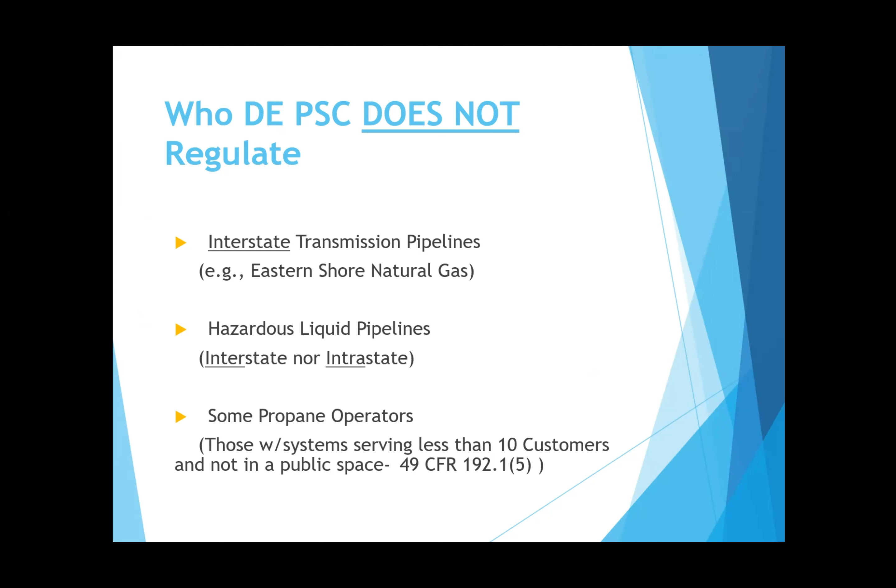Okay, we don't - the Delaware PSC does not regulate interstate transmission lines like Eastern Shore Natural Gas, which is a big transmission line that runs down the center of the state. That's interstate, meaning it goes between states, and we don't have jurisdiction on that. We only have jurisdiction of gas that does not travel outside the state boundaries. We don't have any liquid pipelines in-state or interstate, and we only have jurisdiction on propane operators that have more than 10 customers hooked up, like a community system or tank system. So a lot of the propane stuff we don't regulate.

Okay, so there's me, I'm the program manager. Then we have Chavis Bianco, some of you are familiar with, and then we have a vacancy now because Bob Shafkin retired August 30th. So we're still actively trying to hire a replacement, and it's not happening very easily. We'll keep trying - it's going to affect us because we lost 50% of our inspection capability.

And then we have the underground damage prevention program. That's been in effect since really enforcement started in May of '21. So we haven't been doing it that long, about 3 years.

It started off very lightly, and then we've been ramping up enforcement as time goes. We'll get into that later.

We also have Lorraine Paget here. She's a new admin, started in March, and we sorely needed her because she keeps up on all the record keeping and tracking of all the underground damage records, the NOPVs for underground damage, the consent agreements, and typing up the drafts and stuff. She's very, very good, and also very good at Excel.

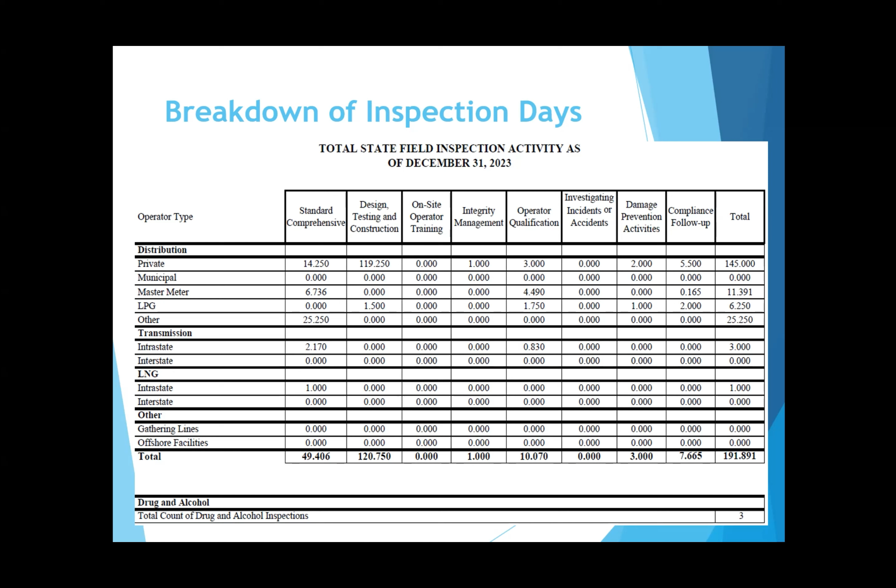We have to make sure that they are continuously requalifying their installers, and we have follow-up time also. So you can see how it all adds up across the different types of operators that we have. It's kind of boring, so let's go on. I know people are going to glaze over looking at this slide.

Now we're going to talk about some of the enforcement actions we've taken between '22 and '24. In '22 and '23, we issued 7 compliance actions containing 19 violations and civil penalties of $14,000. Not a lot, compared to some states, but it still has an effect.

So far in '24, we've issued 3 compliance actions, 11 violations, and penalties of $67,012, which is still on the lower end compared to some states.

But most of the violations our inspectors are finding are not following their own written procedures, and that's bad. Also, sometimes we run across operator staff whose qualifications have expired and they didn't renew them. So that's not good either.

And then sometimes equipment certifications are out of date and not maintained. We also look at the regulators, critical valves, leak surveys, and those things aren't always completed annually. So that's just some of the major ones that we see.

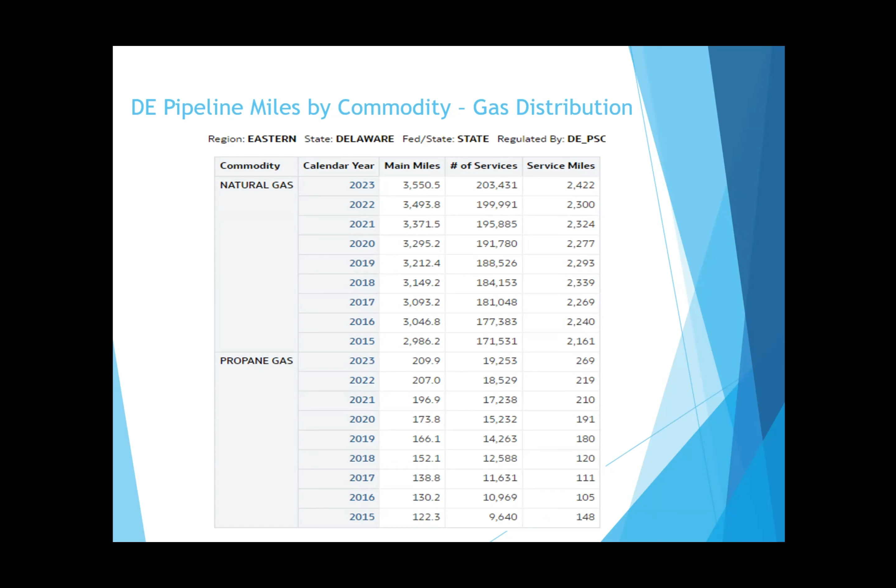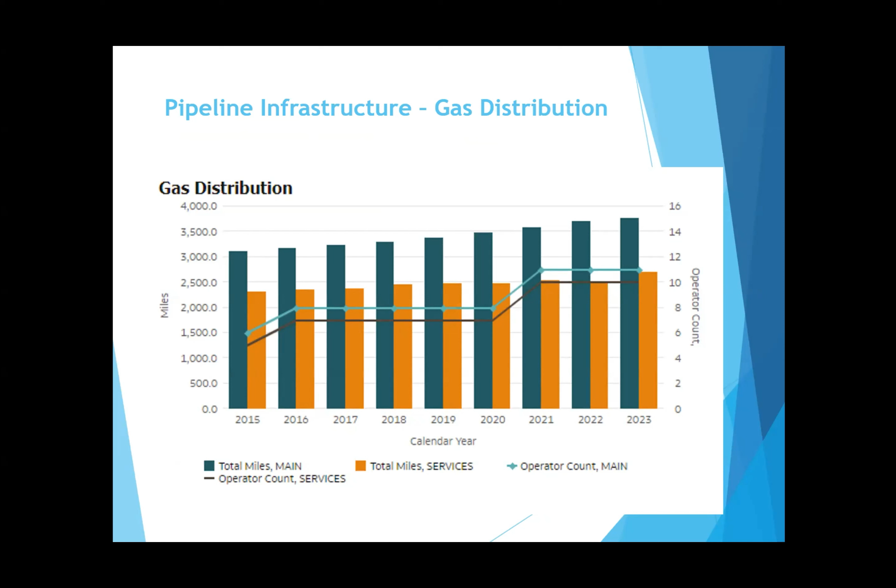Now this is a chart of another way of looking at the data in graphical form, the gas distribution in Delaware. You can see the orange is the total miles of the service lines, and the dark is the main. So it's going up, not tremendously steeply, but it's going up. Let you look at that a little bit.

This is a little more data on distribution here in Delaware. We have 3,760 miles of mains, 24 miles unprotected steel coated, 616 miles cathodically protected steel that are coated, 41 miles of cast iron, which should be completely replaced by 2027 because cast iron leaks a lot, and most states have a cast iron replacement program. We're very lucky we just have that small amount.

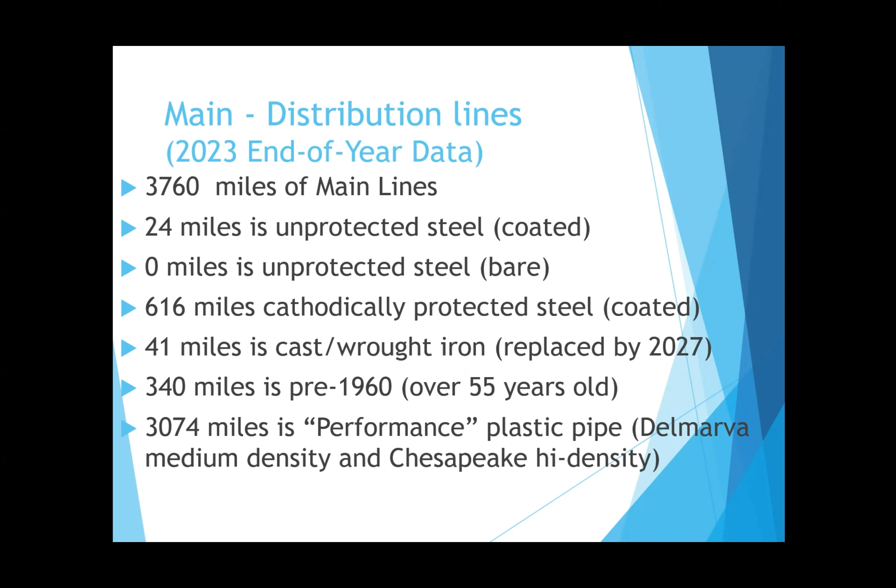Then we have the service lines. We have 2,691 miles of service lines, 81 miles unprotected steel, 190 miles cathodically protected steel coated. Of that, 2,370 is the performance plastic pipe.

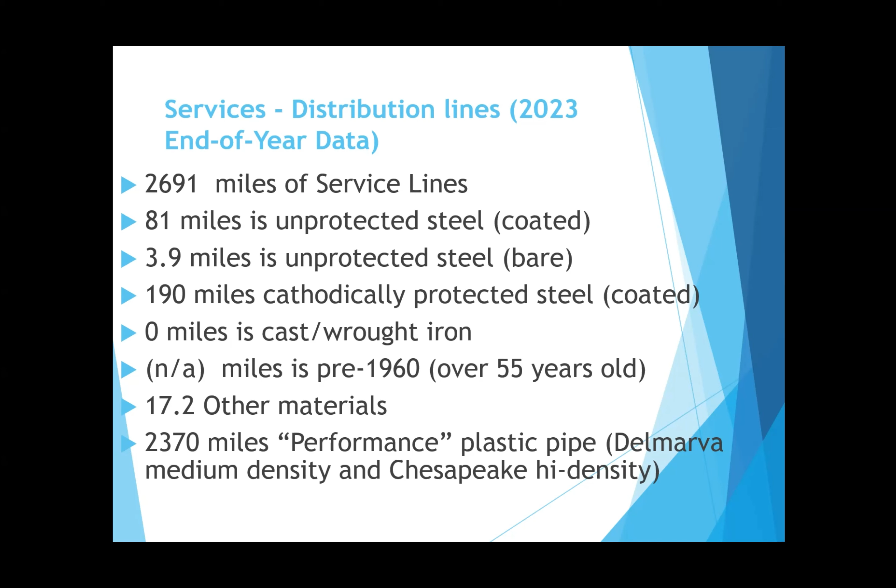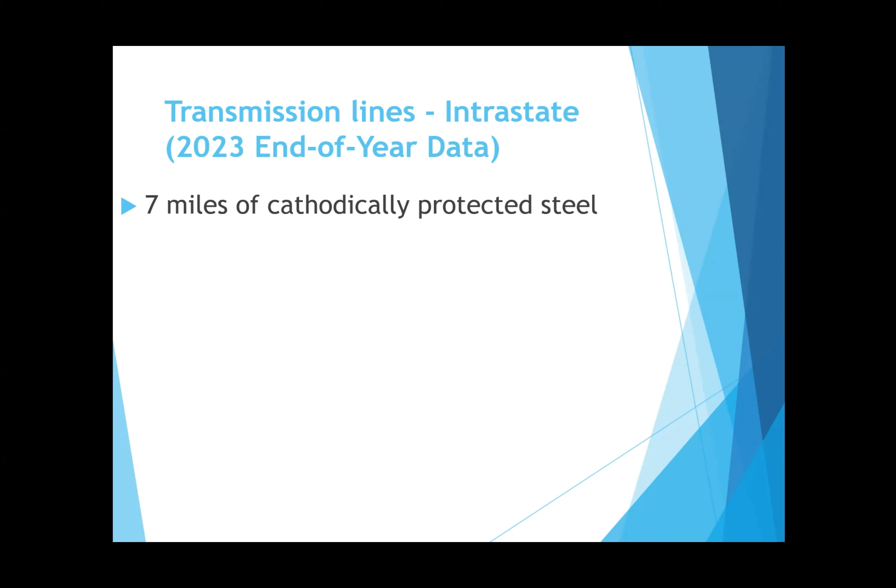And we have transmission lines. We have about 7 miles of cathodically protected steel. That's jurisdictional - that's not counting the Eastern Shore that goes down the middle of the state. That's jurisdictional to PHMSA, so we don't have anything to do with that. PHMSA is the Pipeline and Hazardous Materials Safety Administration.

Now I'm going to talk about the Delaware Underground Damage Prevention Program. We were one of 4 states deemed unacceptable - we weren't doing any enforcement, and PHMSA said we had to pass a law, and then once we passed the law, we had three years to get it into effect. So we passed the law in 2018, and it became effective in December 2020. That was right about the time COVID hit, so that kind of kiboshed it for a lot of people because of the COVID requirements. So we didn't really start enforcement until 2021.

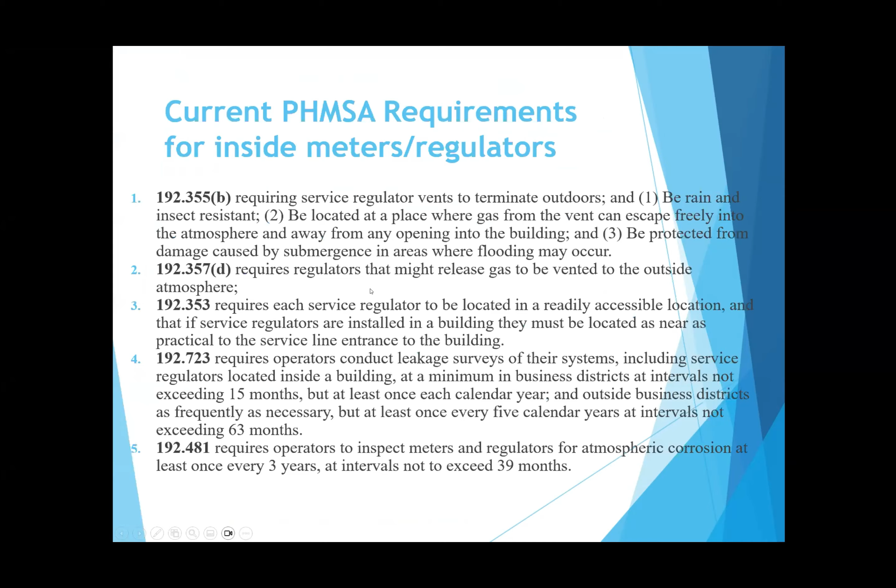Now let's go to the next one here. How do we do that? Just scroll down, or just click on it.

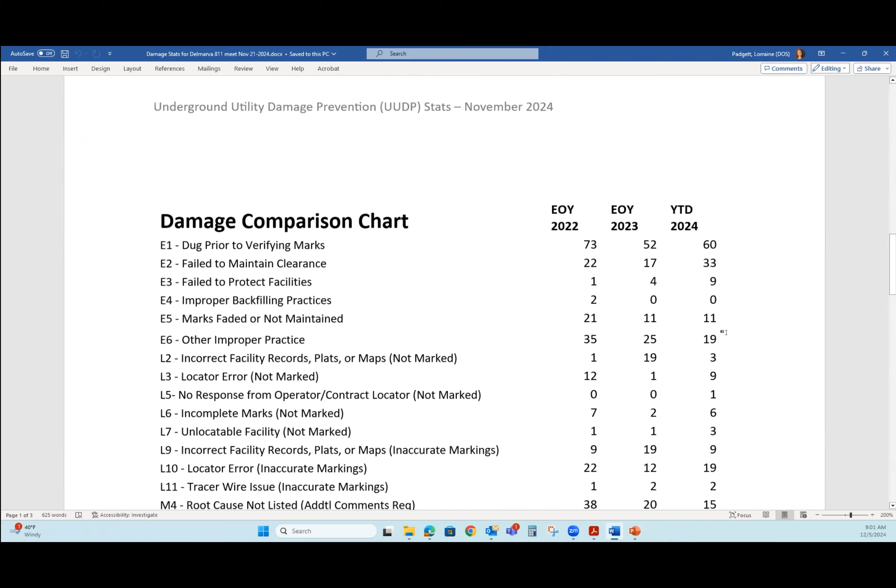This is our damage comparison chart, and then we have the damage repair cost estimates. This is basically all the information that's in that bar graph that we had up there.

We stay pretty steady, but then when you look at the damage repair cost estimates, what they're hitting is different, because it goes from $500,000 for two years in a row up to $833,000, so over $750,000.

We suspect the reason for the surge is the huge amount of infrastructure being put in place this year. You have a tremendous amount of buildings as a county, probably up north too, and then you have the fiber infrastructure going in everywhere that the federal government is paying for, and that's causing damage.

Luckily, we haven't had any PHMSA events, but that's not to say that the damage is not leaking. It's just not at that level yet.

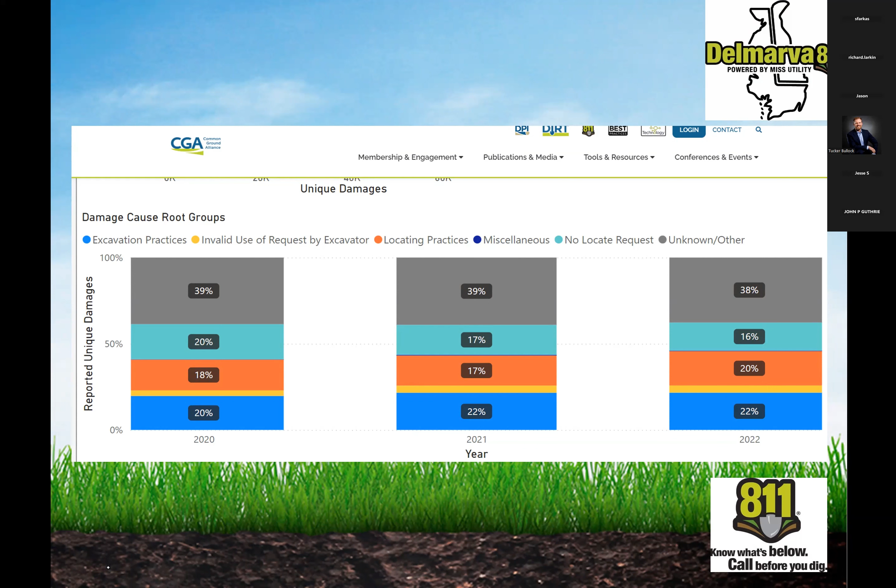It's important to understand that any sort of disturbance of the ground is considered excavation. Now, there are exemptions in our law for certain activities, i.e. agricultural work or patch type paving. But for the most part, if you're putting anything in the ground, that's considered excavation by law. So if you're putting up a fence or if you're putting in a tent that needs to be staked -

I can give an example. There was a very large tent that was put up on the green in front of Leg Hall here in Dover. There was a big political event going on, and they didn't call in a ticket, and they drove these massive tent stakes down into the ground, and it hit a water line, and it turned out to be a very big, messy issue. Maybe people don't think driving a stake into the ground deserves a call in to get the utilities marked, but it is very consequential if they don't.

So again, anytime you're digging into the ground, it's important to understand that you need to call in a ticket. It's a free service. We have multiple ways for you to get that information in, either via the internet, there's a mobile app that we have, or the old-fashioned way of calling either 811 or the 800 number on the screen. I should mention that our website has changed to delmarva811.com. However, if you still type in Miss Utility Delmarva, it'll redirect you to our website, so that should be good continuity in there.

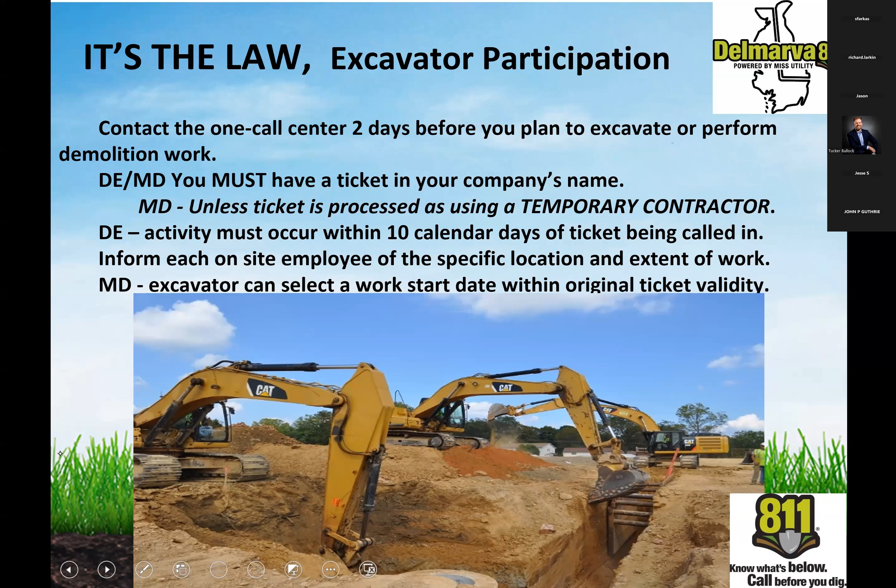With regards to excavators, there's a lot of information necessary to be submitted to do the work in Delaware. A lot of times we see the major issue in our industry is communication, and getting the right people to talk to the right people when there is active construction is important. So a lot of the stuff that needs to be submitted by the excavator as well as the facility owner are in front of you. We need good phone numbers, good emails so that we can get in touch with people. There's nothing worse than getting a phone number to a clearinghouse and you've got to talk to a robot, so having good numbers is very important.

So what we do in conjunction with our contractor, One Call Concepts, is we send out a yearly update to get this information from everybody, both the excavators and the facility owners, so that we have the most up-to-date information possible to make sure the communication can be as beneficial as possible.

So again, I'm not going to read every one of these things. One thing I would mention is that a ticket length is a quarter mile, so if you have anything longer than that, that would require two different tickets, and we'll get into that later in this presentation.

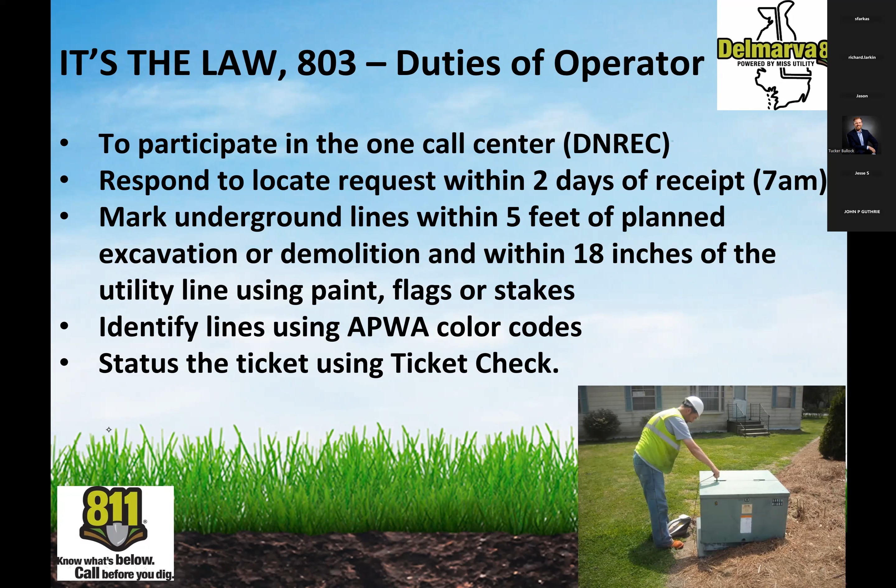And of course, the color codes are very important, which we'll get to in a little bit. And then the facility owner then has to utilize, they have to status the ticket through the ticket check system to make sure the excavator knows that they have marked the infrastructure.

I will say that purple, which is reclaimed water, irrigation, slurry lines, are becoming more popular. They're very, very popular in the southern states, but they are moving their way up the coast. So in this region, we're starting to see more and more of that being marked out.

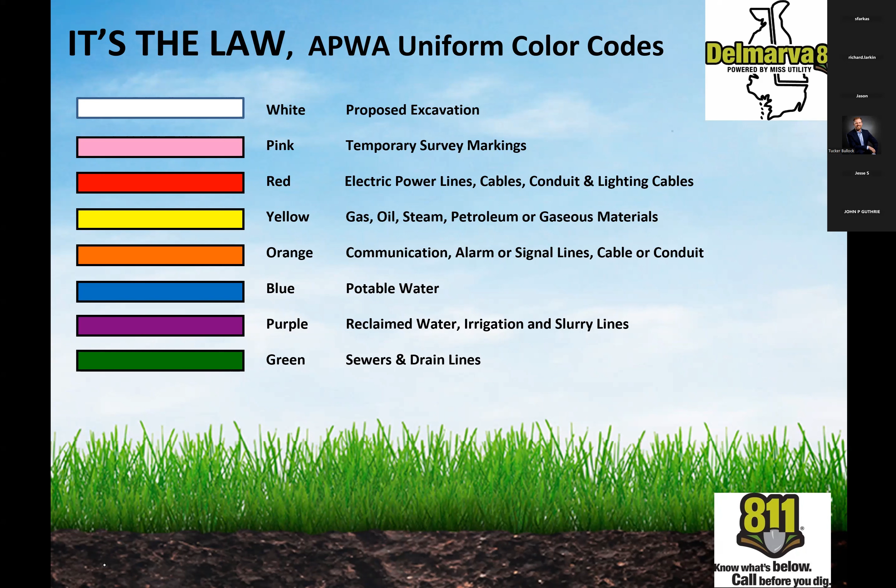Generally speaking, there are rules for each utility type with where their ownership stops. For example, with gas, generally it's at the meter, which is on the side of the building. With water, it's at either the meter or the curb stop, which is at the property line.

So it's very important for everyone to understand that some utility companies don't mark onto private property, and that is a business rule that they would have provided.

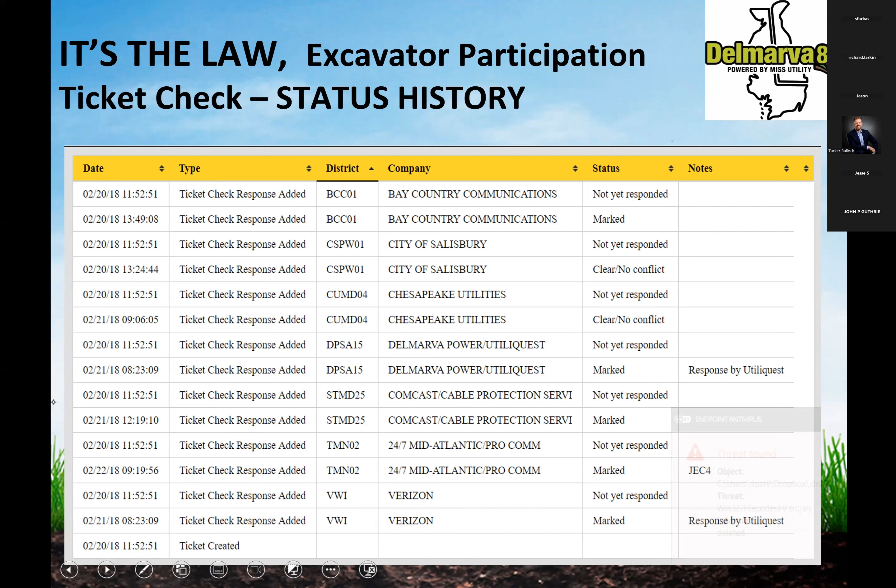Because ultimately we're trying to protect infrastructure and people, and we don't want any sort of accident to happen if it doesn't need to. I realize this would cause delays in construction, and time is money, but we're really trying to be safe here.

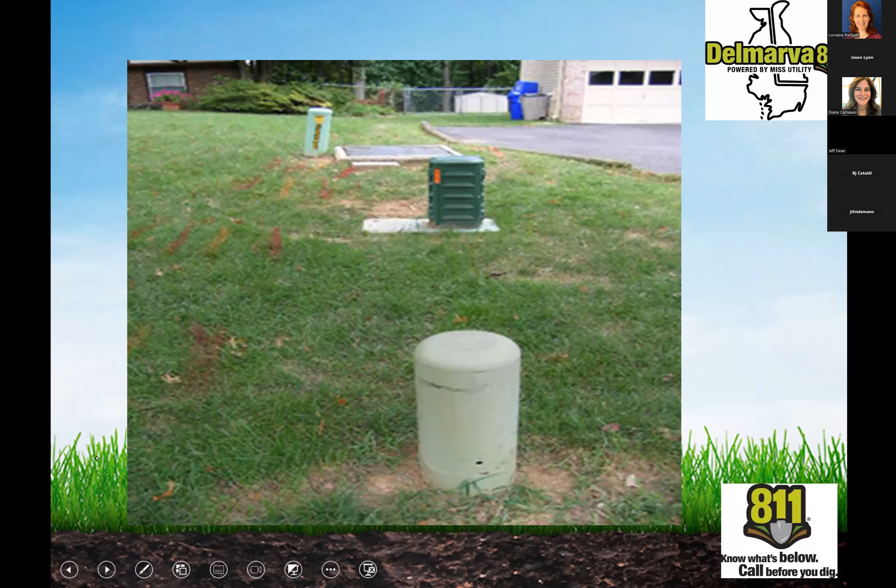Again, more examples of unmarked facilities. If you see something like a gas meter and there's no yellow lines coming out of it, that's probably a problem that didn't get marked, and we should be prudent and try to find that information. A fire hydrant with no blue lines coming out of it means it's a mismark, or a light pole with nothing on it most likely means you're missing some electric lines that were not marked.

When you are an excavator, we talked about the tolerance zone earlier. Currently in Delaware law, you are to hand dig within 24 inches of the mark. This means you have to be careful when you're within 24 inches of a mark to locate the utility before you can use excavators or mechanical equipment. We always urge folks to start from the outside and work in, carefully digging to find that utility to make sure they don't damage it with an excavator, backhoe, etc.

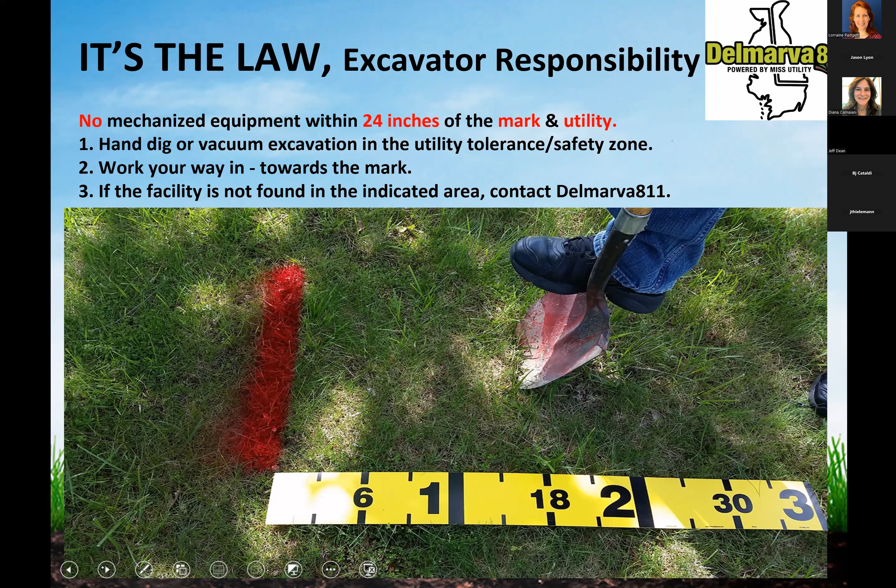This happened when they did their 2 foot safe dig. The good news is no one got hurt, and the actual active line was the one on the right, not the left. So this is an example of doing prudent excavation to the letter of the law, resulting in a safe outcome. We urge folks to always dig 24 inches on both sides to make sure everything is clear.

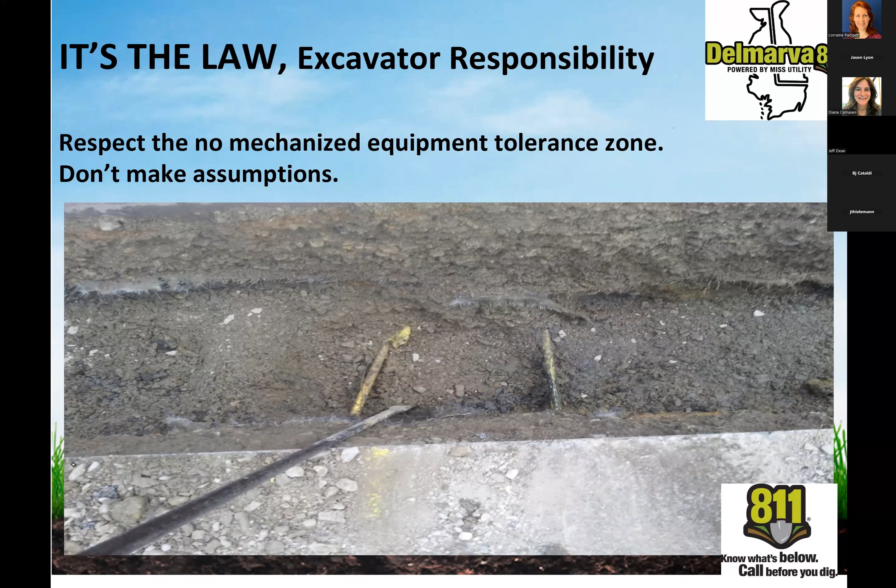Okay, so this is essentially, again, back to the excavators. If the marks are damaged, which often happens on a large site where there's a lot of grading, you must call in a remark ticket. That is on the onus of the excavator to make sure the marks are still active and can be seen.

Also make sure that you have a valid ticket. So if for some reason the scope of work changes, or if there's a long delay on the project, just make sure you update the ticket, so that all the utility companies are aware that the project is still going on.

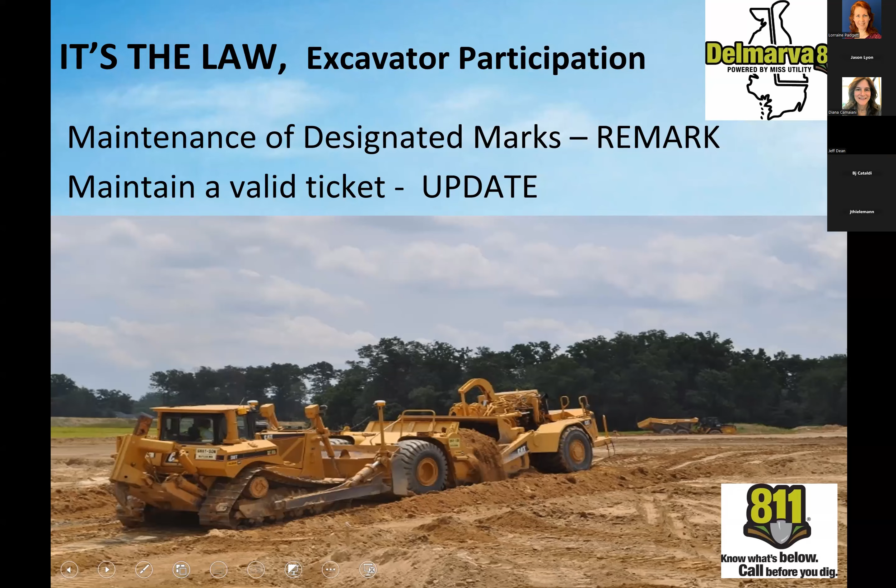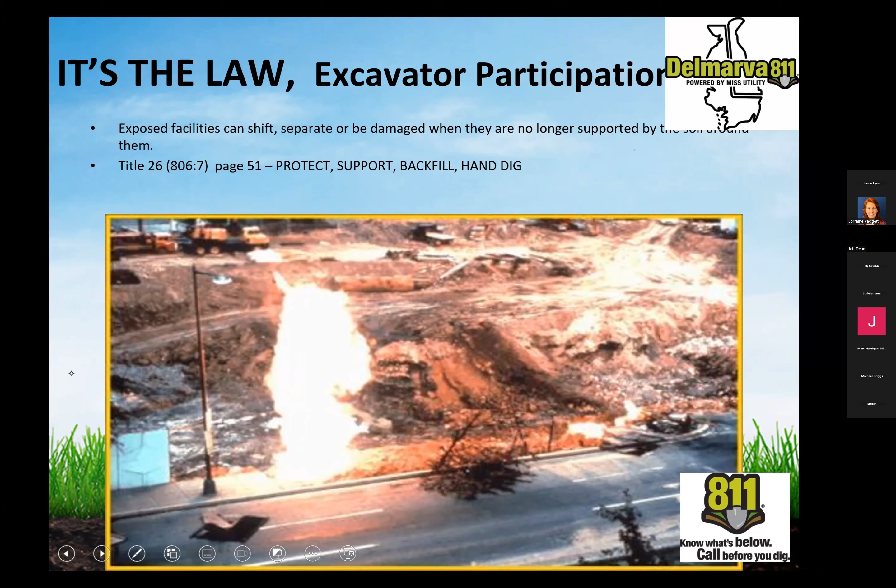This is another example of when you're installing infrastructure, you're going to come across different lines. Make sure you support them and dig around them safely and be careful when you do that. We have a note here about damage reporting, which we'll get to in a little bit.

That's Maryland law, we're going to skip that for the basis. This safety presentation we provide to contractors and utility companies is kind of an all-in-one presentation. We try to show folks that there are consequences for not doing this.

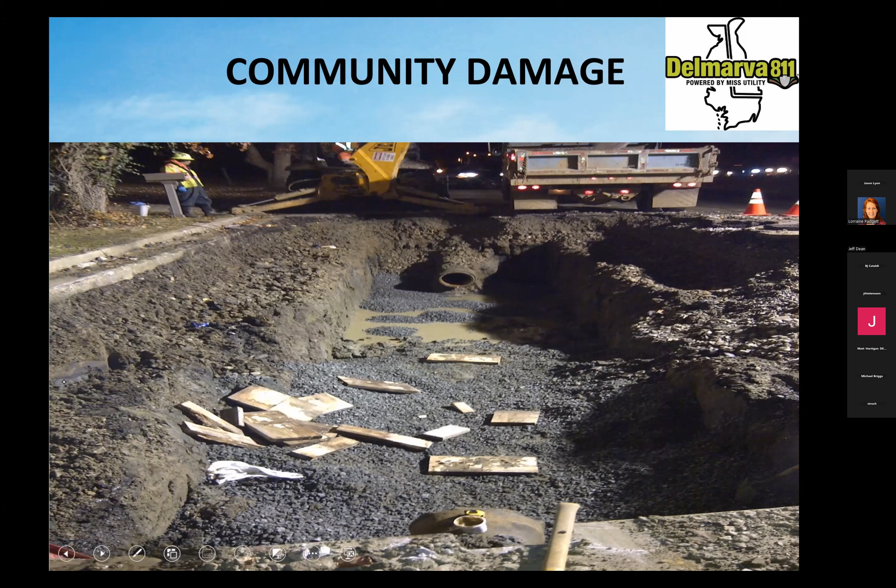This picture shows how much stuff can be put in the ground. This was a boring job that ripped up a whole bunch of underground infrastructure. What we're trying to show folks here is, on the picture in front of you, there are two saw cut lines through the asphalt. You'll notice that there is no paint on the ground.

This is another example of, as an excavator, looking around your surroundings and seeing that if there's a trench, a saw cut trench, there's probably utilities in there. And if there were no marks on the ground, then maybe you should have called in. Well, you certainly should have called in the first time, but you would have to call in again if you didn't see any marks.

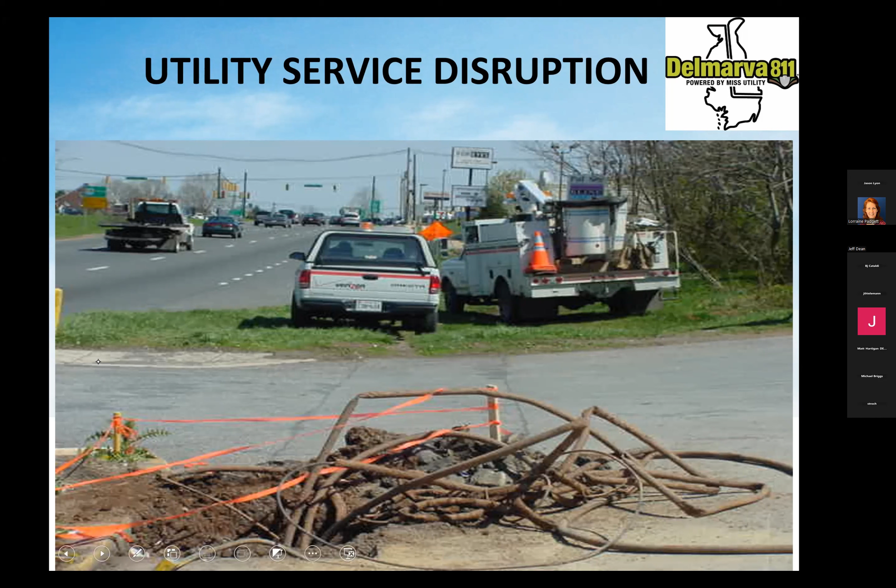But I think everyone should understand that it's not just you. If you were to get into an accident, obviously you have to deal with it, but your family members are now going to have to suffer for that. So as an owner of a utility company or an excavation company, please take this to heart and follow the rules in place to protect this from happening. I've heard too many stories in my 15 years on this board of this sort of thing happening, what it tears families apart, and not to mention what happens to the person physically and mentally going through this.

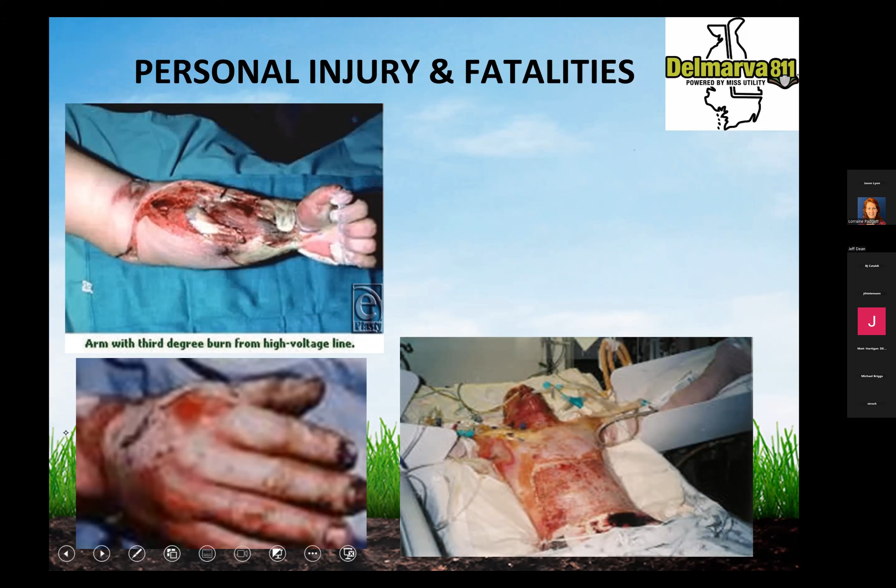Shifting gears a little bit. Wayne mentioned the requirements from PHMSA to report damages. The Public Service Commission is the entity that would receive the notification. As Wayne mentioned, if you're a gas company, you have to report every damage. If you are non-gas, anything over $3,000 must be reported within 15 days of the issue.

Again, I want to emphasize this discussion is really about safety. Boiling it down, obviously there's laws and best management practices, and there's always the give and take of getting the project done on time and getting stuff located. But ultimately, we want to keep humans safe, the environment safe, the utility and property safe. So that's our big message here.

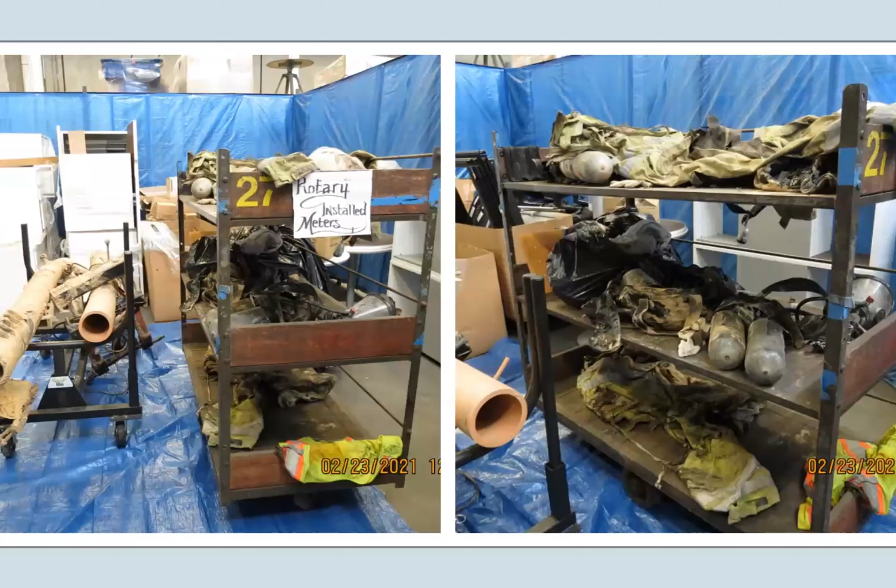This operator has an incident investigation procedure as required. They have a process to store and handle and collect a lot of evidence, and it doesn't have to be anything fancy.

It can be something as simple as this - just a warehouse that's secured with some chain link fencing. It has some tarping, and you can see it doesn't have to be CSI Miami. This is a warehouse that does have extra items in it that are not evidence, but it's secured and there's a log and only one person has a key. He doesn't let anyone in or out without that key. And so you can start seeing we have pipe fixtures, the things that you can see were collected during the actual incident are now here.

And now, after having more of the information come into focus, we have the opportunity to review that and any types of records of the chain of custody.

I want to just let this sit here again. Someone was wearing this uniform, this fire retardant clothing, this breathing apparatus, and this hard hat - all speaking that this person was well aware of the hazards of the product they worked with, and they were prepared to follow procedures because otherwise they wouldn't have been wearing this. And you can also see the significance of the injuries that fire retardant clothing still failed to protect this person.

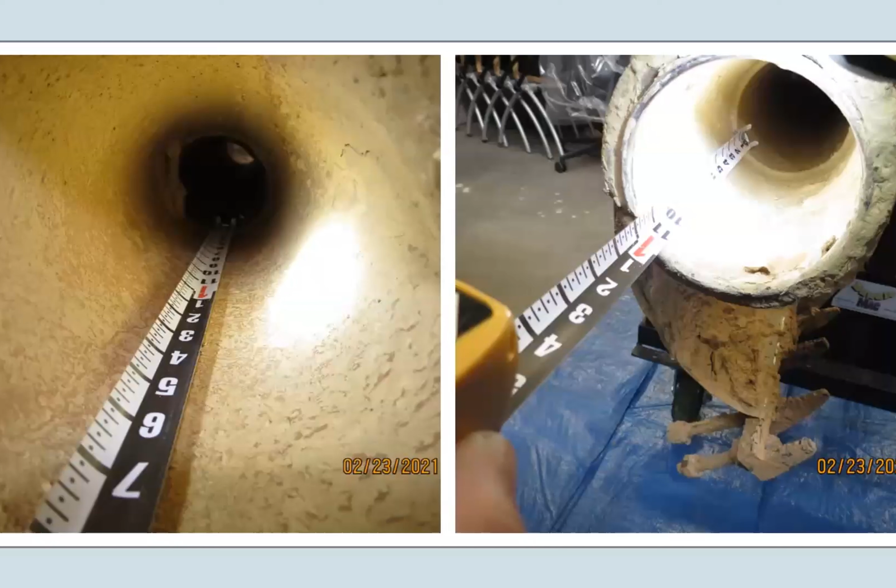So we're looking at some of that pipe. Again, I drew attention to a piece of pipe that looked like it was cut, and now we're seeing this is certainly a fusion, using tools to document the depth, length, and diameter of pipe. We can see this is stick-built pipe, a typical length.

It's unusual to have a fusion about 11 inches from the end of the pipe. And then after that fusion, there's another fusion. So I have some investigative inquiry and questions for our operator.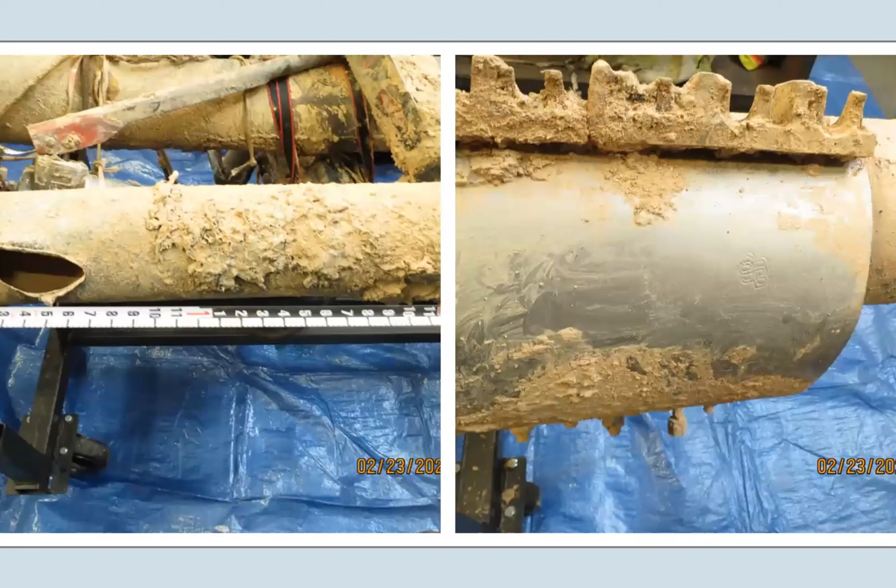Here's an example of documenting the actual defect that I showed you in that mud slurry. A lot of speculation - we can start creating hypotheses about what could have occurred to the pipe, but I'm not a material scientist. I need someone qualified to look at this piece of pipe and tell me, was that thinning of the pipe wall due to heat impingement? Or is that some type of material failure?

I can say that this appears to be some sort of metal deposit on the pipe, but I can't tell you what type of metal. I suspect it may be sloughed off aluminum from the shoring box.

Here we see another Smith-Blair clamp, and these are the two pipe segments side by side. There is value in also using analogs - ask the operator, we inventoried your truck, and these are what we're seeing in the evidence locker. What type of clamps are approved or in use on your pipeline system for the work this crew was doing? This picture documents that Smith-Blair type clamp and another type of clamp the operator was using at that point in time.

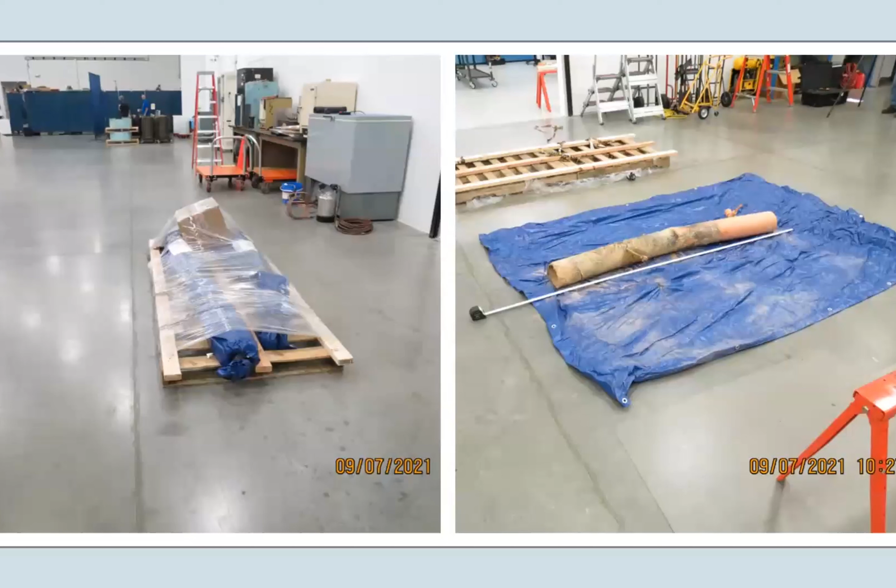All that being said, we, the regulator and the operator, need to know more about exactly what caused the incident. We need to evaluate the material and the fusions. So the operator selected a laboratory. The evidence is thoroughly packaged, methodically transported and cataloged. These are pictures from that laboratory examination where the material is carefully unpackaged, examined, and documented yet again.

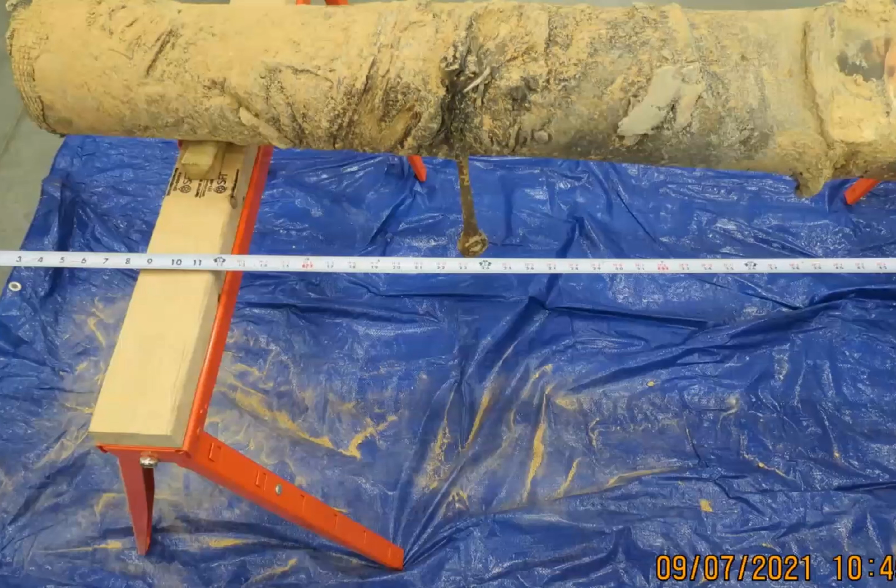We can see the segment of pipe - an Aldyl-A historical legacy pipe - and we also see some defects in it. This is a half inch ratchet that's fused and melted into the pipe. We see a lot of heat impingement and damage to the pipe. We can see some markings consistent with the analog we saw with the sleeving material and gasketing material inside that Smith-Blair clamp.

Prior to any examination, whether plastic, forensic, metallurgical, in-house or outside, there really should be a dialogue between operator, regulator, and interested parties to establish some sort of examination protocol. How will you receive the pipeline segments or evidence? From that, what will be the various cataloging and examination steps - NDT testing, and then destructive testing. Because after all, you want to make sure you do all your non-destructive testing.

And then you want to do your destructive testing. What are the objectives? Make sure each party is informed - this is what the plans are and how we're going to examine this. We're going to do all this NDT testing, and then we're going to destructively test this portion.

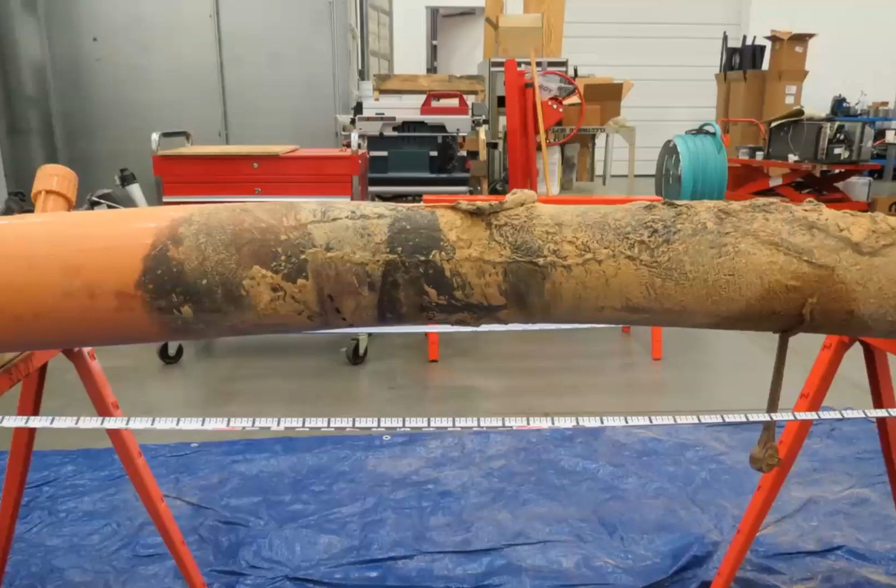Here's an example of packaging and documentation, again focusing on that half inch ratchet. Cleaning is part of that - this is after the pipe is gently cleaned to show more of the defects. These sawhorses are leveled and shot with a laser level, and you can see there's a defect or a hump in this pipe.

Again, I'm not a material scientist, but as an investigator, my question is whether this defect is part of the heat impingement and plastic softening. I would say more than likely, but that's a question for the material scientists and engineers conducting the forensic examination, which in fact it was.

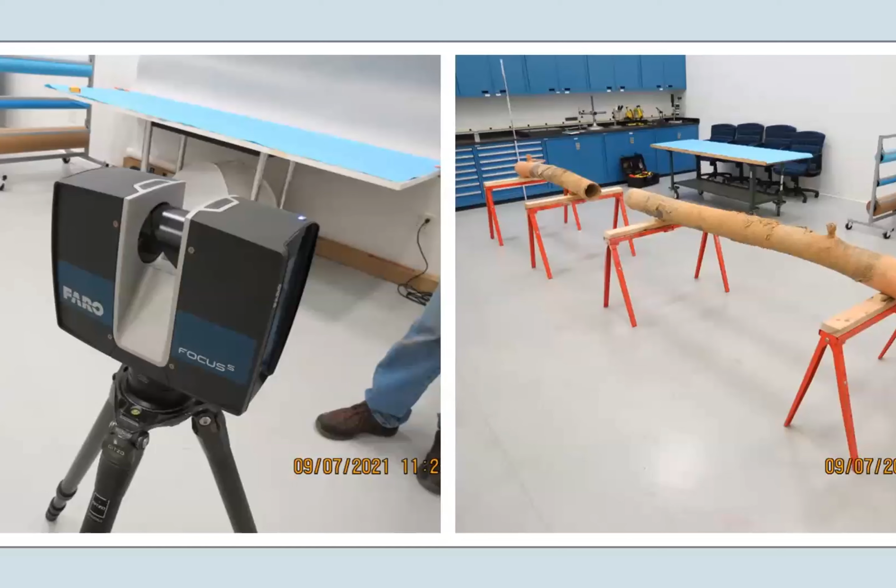To illustrate that, we are taking a lot of documentation and photographic evidence of these pieces of pipe, but we're not trying to fit them back together physically. There's a process to do that - we don't want to damage the fractured ends or any of the artifacts on the pipeline. So what the operator's contractor was using is 3D scanning photographic technology.

We have our two segments of pipeline, positioned approximately in relation to each other. You see the engineering scale. Through the power of selecting the right laboratory, if you need laboratory analysis as an operator or regulator, you're able to actually reassemble that pipeline with those types of tools in the virtual space.

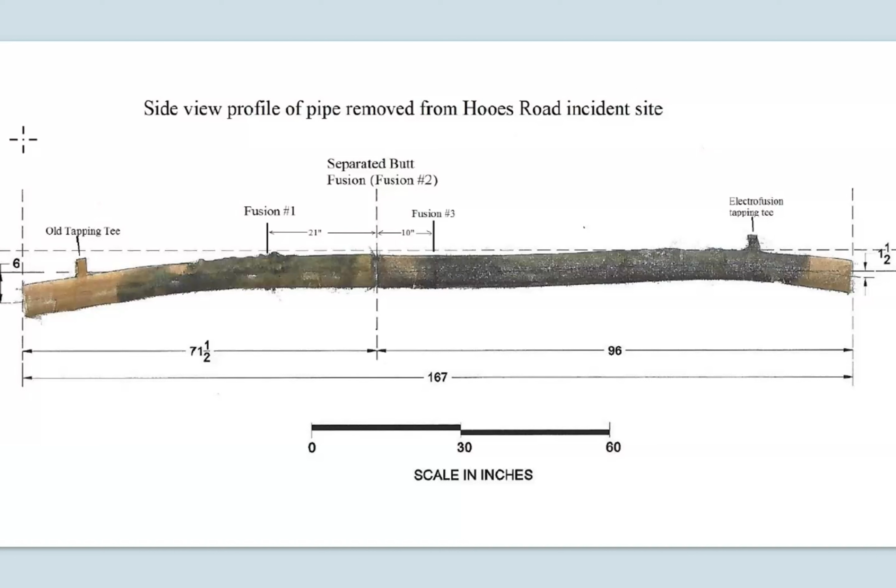So drawing your attention here, again, stick-built pipe at the top of a hill, you're starting to see more and more of those barriers aligning, aren't you? We have two pups of pipe, three fusions. The failed fusion that looked like a cut section of pipe is in the center at the apex of that hill. We have an old tapping tee and what looked to be a new tapping tee, and we can see how they all interplay and interact with each other.

Again, you can see metal deposits. Those were analyzed, along with other defects and imprints in the pipeline, and the elements of the squeeze off that were indicative of it being deployed and moving as the pipe thinned and softened.

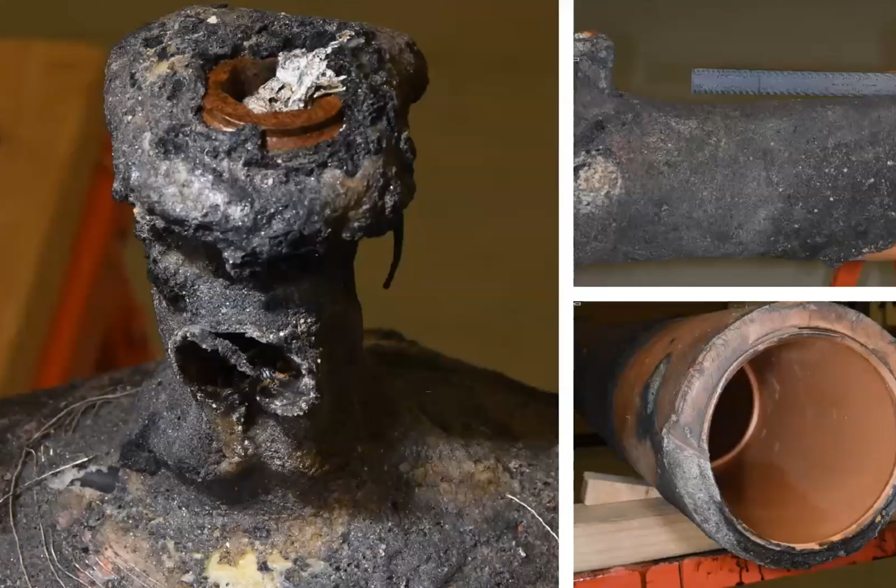And more photographic evidence of the electrofusion tapping tee. We can see the coil there. And again, material analysis would later verify this is a medium density modern tapping tee, using engineering scales to show how much mass loss there was.

Close up, high resolution photography of the actual fusion. A conversation that the operator and the regulator both had, we both shared. We wanted to know, was this a cold fusion? Was this a bad fusion? And something happened to it, right?

So we can use the operator's contractor to conduct scanning electron microscopy and X-ray spectroscopy, with high resolution images of both the fracture points and of this tapping tee. And through that, again, we find the probable cause, the root cause, by examining thoroughly documented evidence that was collected the night of the incident.

This is beyond a doubt. This is proof that in the 1980s, the crew made a joint that by all appearances likely passed a visual pass. But because they were making two pups of pipe fit the trench line at the top of a hill, they lacked adequate pressure time or facing time of the two melted fusion joints and made a cold fusion joint, as exhibited by the cracking in the fused material.

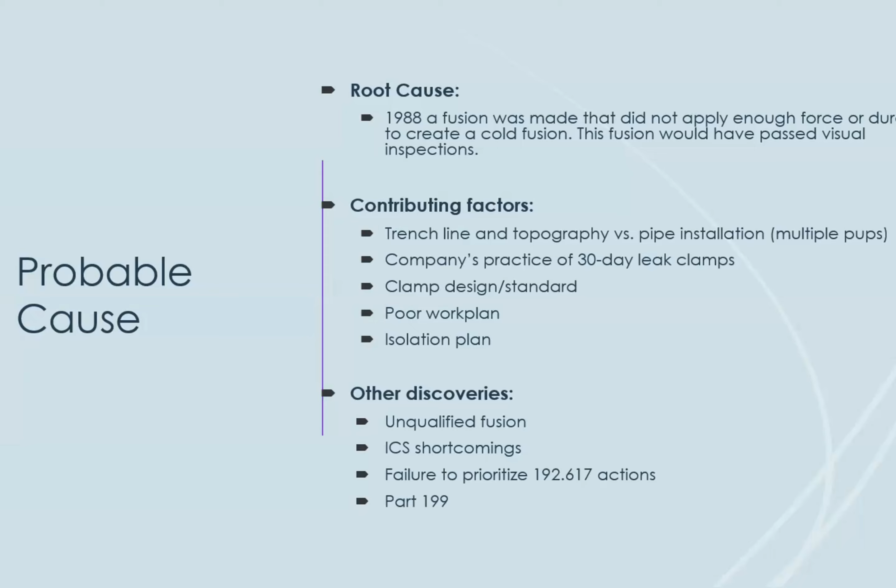So those are some of the backgrounds. I know that's been a long presentation of 34 slides, but I hope walking through this has helped you start generating questions about what each of your organizations do, both as a pipeline operator and as a regulator, to work through an incident. Are you prepared? Have you trained? What are your processes and procedures to delineate the expectations of your staff when you're on site of an incident? I'd love to turn it over to any questions or comments you might have.

Great presentation. Appreciate that, Scott. Appreciate it. Thank you, Richard.

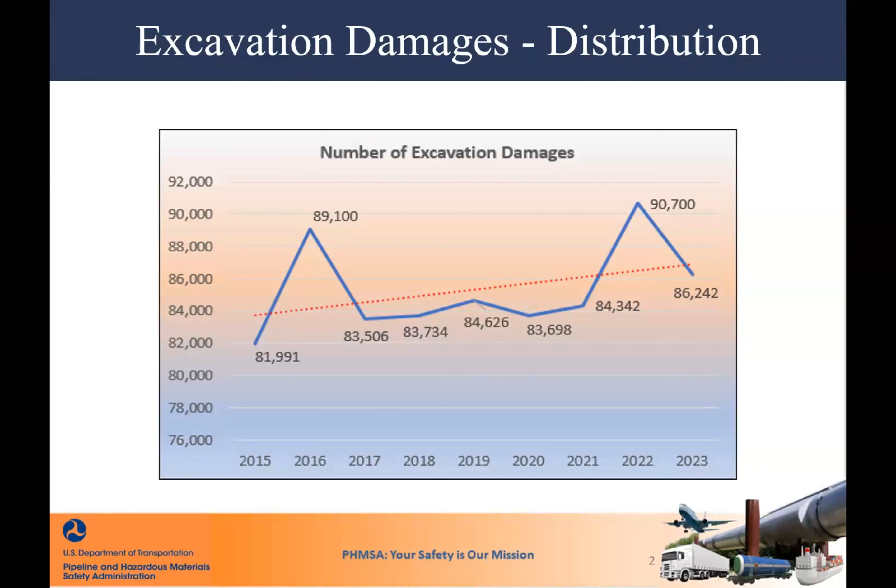Thanks so much, everyone. The 22 to 23 trend line has gone up over time, so I'll be anxious to see what 24 yields us. But, again, as I said, we always have talked about how our damages per thousand have trended down over time.

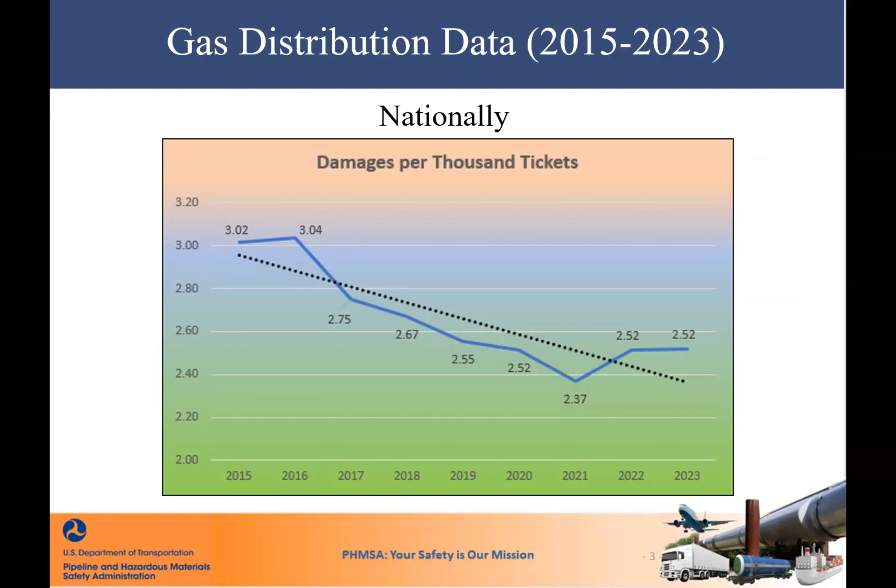While that's true, we have to ask ourselves why it's trended down over time. The answer is not because we've reduced damages. The answer is because we've increased the generation of one-call tickets, and that drives up the denominator. Even though the numerator increases, the denominator increases more, giving what I call a disproportionate negative or disproportionate positive optic on our state of the union when it comes to excavation safety. So for those of you who preach this message, keep that in mind and feel free to use those slides.

So this is an example, and this is the state of Florida. This all stems from an article that the CEO of the Common Ground Alliance wrote about a year and a half ago now. It talked about this incredible growth of infrastructure in the state of Florida, which, by the way, is where I live, so I am talking about my own backyard. At the end of calendar year 2022, the state recorded nearly 24,000 excavation damages throughout the state.

And that's all utilities, that's obviously more than what we in the gas and liquid world are used to, but that's statewide, all utilities. And again, the CGA article, the data that they acquired, put 76%, three-quarters of the damages in one of three categories: not calling 811, utilities not accurately marking their facilities, and failure to maintain adequate clearance. And I got to keep underscoring that this isn't a PHMSA generated thing, this was a CGA generated article.

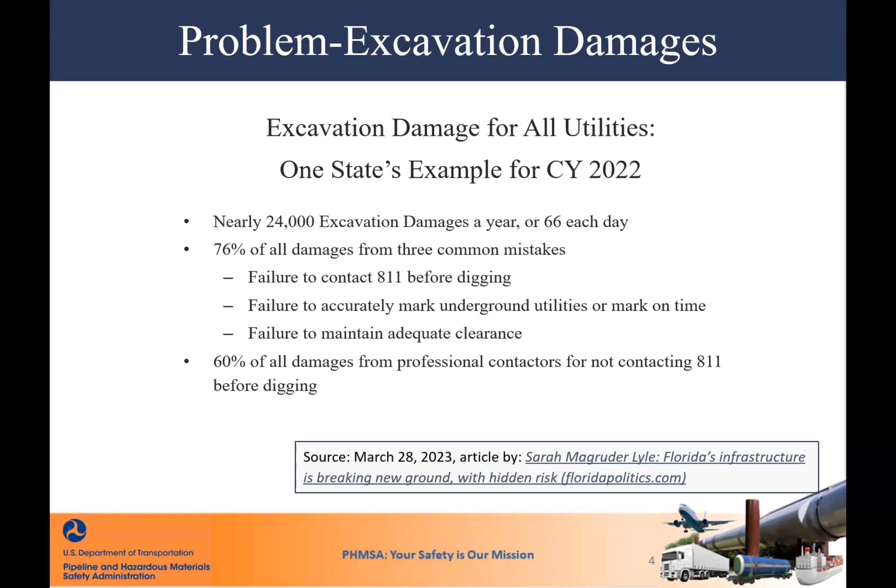60% of the damages from those three categories listed above were from professional excavators, whose full-time job involves excavation. And 60% of those from those professional contractors were for not calling 811. And that should make us scratch our head a little bit. Why is it that high?

So when we look at that same slide from element 7, effective damage prevention program enforcement, damage prevention enforcement, because that's how we hold people accountable, we see 76% of those are violations of Florida's one-call law. And I suspect they are violations of every state's one-call law - using 811, operators marking their facilities, and the like. So 76% of that 24,000 is 18,240 violations of the Florida state one-call law just for calendar year 2022.

And you can see below that 14,000+ of those are from professionals, that this is what they do professionally - 14,400 violations of the one-call law.

You go to the gray box - state of Florida in 2022 had 34 enforcement cases for those 18,000 damages. And I'll highlight again, when we talk about 24,000 damages, how many violations of the law occurred? Because not all violations of the law led to a damage. So if 24,000 led to a damage, you really got to wonder how many violations there might have been. I have no way to know, your guess is as good as mine. But this bottom bullet here, that's an enforcement to damage ratio of 0.19%.

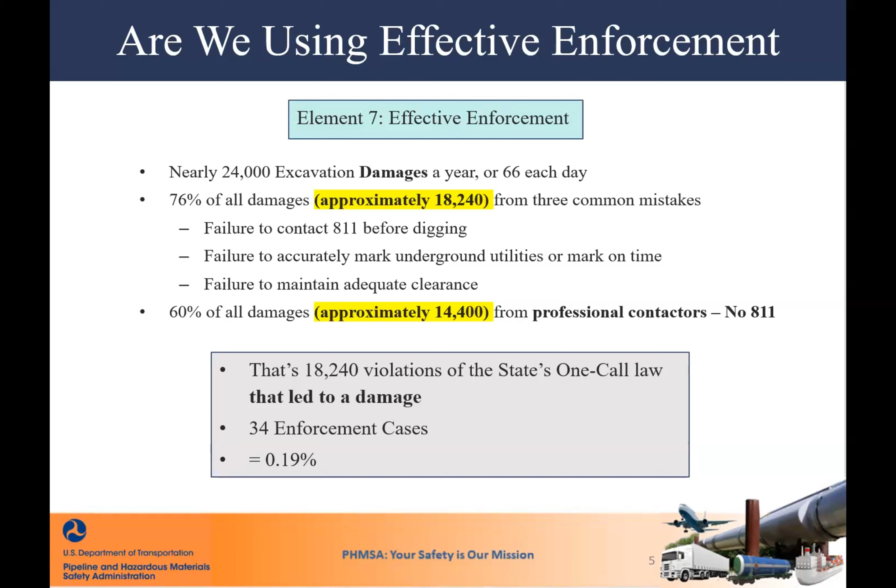So I mentioned utilizing integrity management, and what the previous couple slides have shown is that enforcement, simply a tool to mitigate excavation threats and excavation damage, has been wholly ineffective over time since the beginning of this excavation safety effort, going back 20 years. Enforcement has not been effective, that's just a reality. So I was challenged by my executive leadership to see what we could do to work through the lack of effective enforcement.

And it occurred to me that every one of you regulated by way of the Pipeline Safety Act are held accountable to a lot of other things that deal with excavation safety. And I put that in this, I think it's a Venn diagram if I remember correctly. But when you look at all of these particular topics that you're held to by way of regulation, all of these can address excavation damage and excavation safety. And in my simple-minded world, integrity management, or DIMP as highlighted here, is really the hub of what we do for safety - identifying the threat and mitigating those threats.

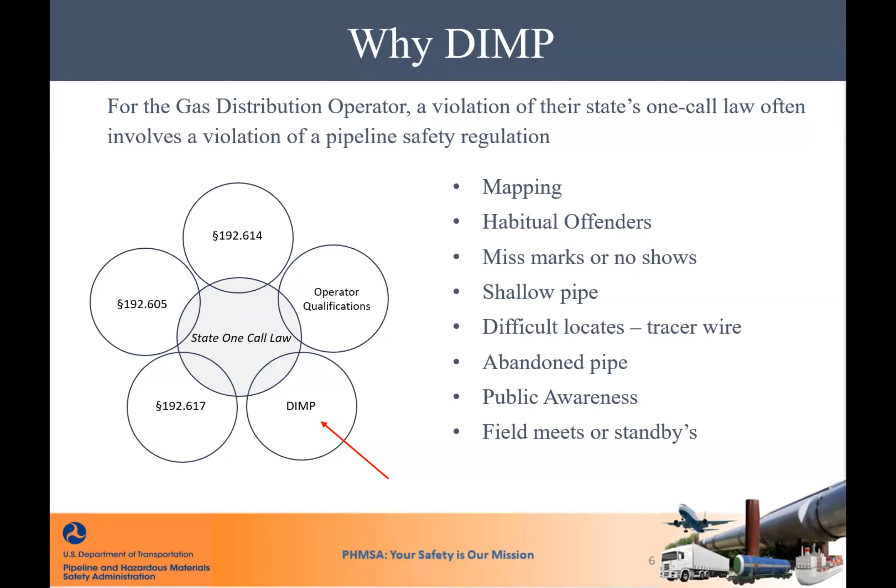That's in my simplest perspective with my lenses on it. Every one of you on this call knows how all of these different regulatory factors impact excavation safety, but they don't for the unregulated. So, and this is basically the DIMP program, and all of you know this.

I put this up here just to say, in my mind, it's about threats, mitigation, and measurement. What are my threats? How am I mitigating them? And how do I measure whether or not it's been successful?

In early 2023, we started a pilot, and we did something very unique in the history of the regulator and regulated dynamic. PHMSA and myself sat down with the state partner, and we sat down with individual operators. The three entities sat around a table, and we identified what their metrics were, what their problems were, what were their threats.

When we agreed on what their threats were, we let the operator identify what their mitigations were going to be. That's bullet number 3, we establish performance expectations under the umbrella of DIMP. And the fourth one, again I'd encourage you to take a hard look at these things, because we're going to be rolling this out to everybody. The three entities sat around the table, established threats, established a mitigation, and then we asked, what will you do towards the mitigation you just identified in the next 90 days?

That really raised a couple eyebrows at the executive level within PHMSA and even the Department of Transportation. This particular metric has gone up to the Secretary's office and is now a metric that is measured. Because 2023 was such a success, we continued it into 2024. You can see from this slide, we went to 4 more states and 6 more operators. We've already started the same program with these guys, also large operators. Together the 2023 and 2024 operators account for more than a quarter of all the excavation damages that occur in the nation every year.

So, there are success stories in every one of these so far. There are success stories, and you'll see one here in a second.

So, Dave, you went out to these 11 operators and talked about threats and mitigations. What were some common threads across all 11 of these large operators? There were several things that were common complaints, common threats, which I know are true in the state of Delaware as well. These are just 3 of them.

We're not going to spend a whole lot of time, but locator performance - everybody, all 11 operators, initially identified locator performance. Within that, from unlocatables, you can see the unlocatables, contract locating, in-house locating, whether it's single source locating - all of these different things tied to locator performance. And the one thing about locator performance is that it's entirely the accountability of you, the operator. So that was even in the 11 - all 11 operators identified locating as one of their greatest threats.

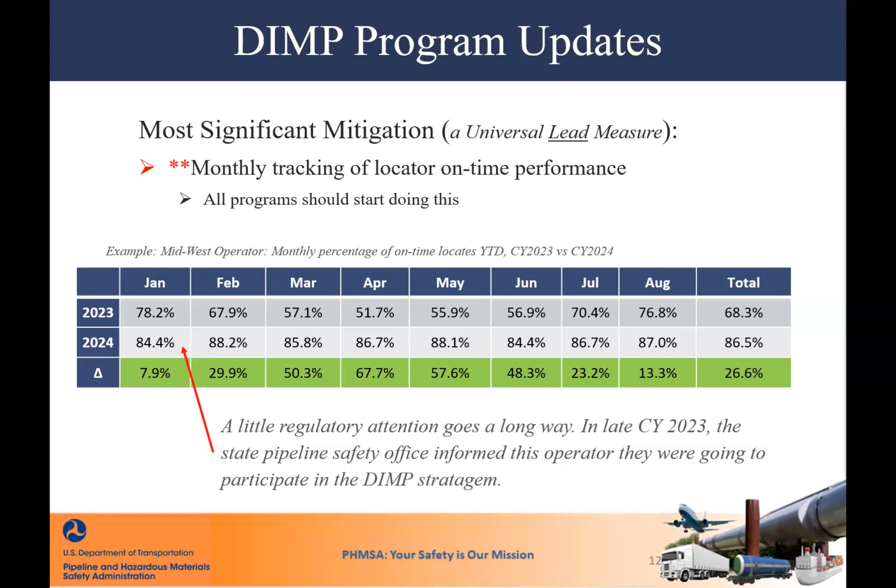Again, on-time locating - if they're not on time, you run the risk of all the risks that come with not having that facility located. So this is just an illustration of what it looked like with a particular operator last year. And here's a dashboard - this is SoCal Gas. Now they're a giant operator - this is Los Angeles and the Southern Cal area.

They were the second pilot operator in 2023, and their numbers weren't much different than this person before us. They were in this kind of category when we started this pilot. And once we started looking at this - we meaning the state CPUC, the California Public Utilities Commission, and PHMSA - they got serious. They moved 100% of their locating to in-house and built a robust metric-based program around locating.

Their executive vice president, who was in the room with us when we met, said we are not going to fail in this. And this is an illustration - this is the first half of 2024, and that's their performance. I honestly, this is a giant company, and that is their performance with regard to late tickets on time.

You can see none of the damages in the first half of this year are related to late tickets. Now there are missed marks for sure, and certainly no shortage of other damages. But when it comes to the accountability of the locating task, they have excelled because of that.

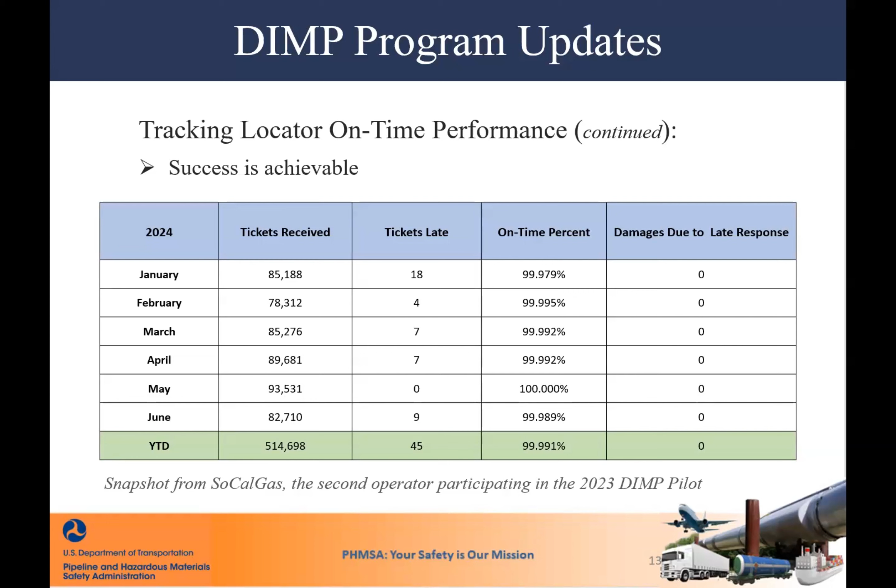So again, takeaway for the folks on this call - heads up, we, PHMSA, are pushing heavily on the states to have operators create dashboards on a monthly basis where we can have visibility into how well you're performing with regard to your locating function. I would scratch that one down as a takeaway, because we're looking to do that.

Well, I mentioned 11 operators, however many states that was, and what's next? What are we doing next? My executive leadership said we're going to continue pushing this. It's effective. We've demonstrated it is effective, and the principles, the concept of utilizing integrity management for the purpose of excavation safety.

Well, the first thing is it's not new. We were supposed to be doing this all along, and I think the DIMP rule kicked in about 15 years ago. There's nothing that ever said we shouldn't be doing this for excavation safety. In fact, I got money in my wallet that says the folks on this phone have excavation damage already listed as a threat in your integrity management program.

But the question is what are the mitigations? And when it was started 15 years ago, the mitigation was participate in 811. Well, this effort is to get down into some tangible efforts that are demonstrated to have a positive yield.

That's my instruction, my orders have been to continue to push this concept, this approach throughout the nation. And we don't just focus on giant operators - it's everyone. You can see there, LDCs, municipalities, and the like, and we are going to continue that.

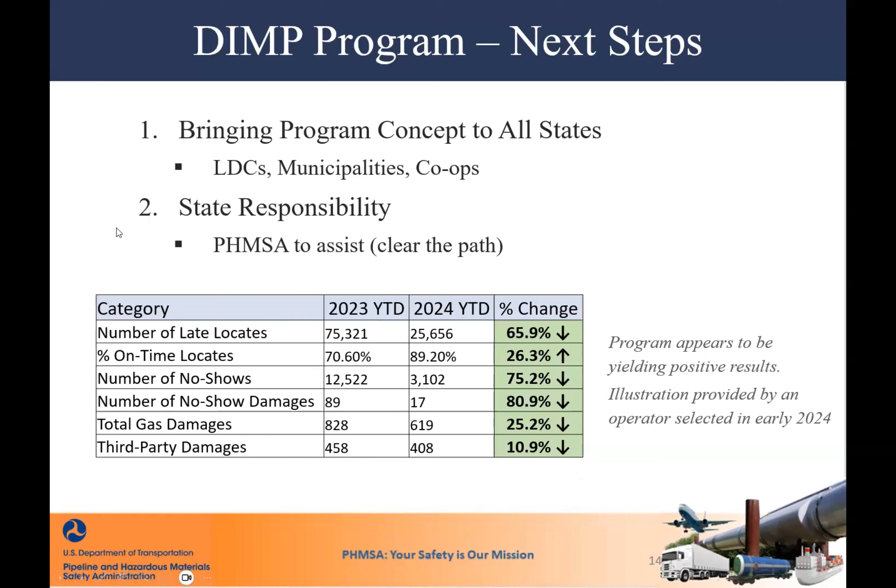Again, this is just another example of one of those operators in these different categories that have shown some positive outcomes. It's just to dovetail the two bullets above that say we're going to be pushing this again throughout the nation. So that's the DIMP program, and while that was kind of an update on all of that, I just wanted to share that with you because, again, it is going to impact you at some point.

The only other update, I just wanted to put this out there as more of an FYI - it's a slightly different topic. As you all know, by this coming March 15th, you will have submitted your 7100 reports, your gas distribution annual reports, that will now have these 26 root cause categories, which are in line with the CGA's root cause categories. That first year for the distribution is coming out now, and there's just a couple of comments when it comes to this.

One of them is on our website. We provide the CGA's guide to these 26 cause categories, and we, PHMSA, use that guide for definition purposes. But one nuance you'll see is that the CGA manual has a caveat saying the data is not used for enforcement purposes.

What's important to remember is that when it comes to dirt data for CGA, that's a true statement. It is not true for 7100 reporting. This came up from an operator who caught this and called me, and I said no. So I'm putting it out there: that statement highlighted in yellow in the guide is not applicable to you, the regulated operator. It's really for category descriptions. Nothing different for you, just wanted to point that out.

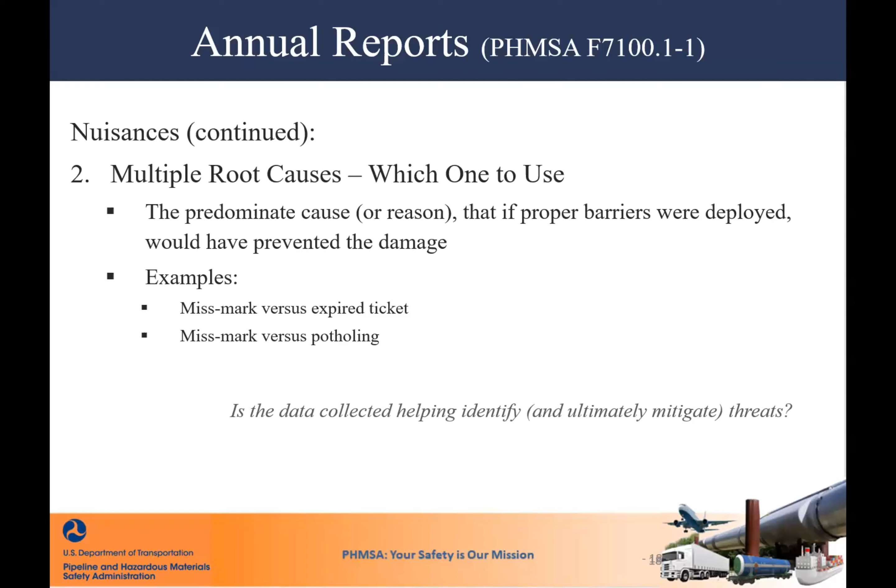So I have rambled on. How am I doing? Oh, look at it. I'm ahead of time. I have rambled on, and this is the opportunity for you folks to grill me with questions, complaints go to Wayne, compliments come to me. But let's ask these questions. We're not helping each other if you're not getting something answered that you wanted to get answered. So the floor is open.

Mr. Applebaum asked: how would you categorize an area where tree roots have created a thatch over top of where we know underground pipelines are located, and the excavator's approach to get in there? Yep, that's a great question.

I get that quite a bit, and your operators aren't going to like my answer. The excavator has a responsibility to excavate safely. So I want to break that question down into a sub question. The first one is, if I am the excavator and I go for got a job marked and it's located, and the located facility is right under a substantial tree with a rooting system,

and I call you, the operator, and say, hey, I'm afraid to excavate here, there's no way there aren't roots impinging on or encroaching on your pipe, and I don't want to damage it. What's the operator's answer? I've heard, well, do your best, or we'll come and relocate our pipe, but you're paying for it.

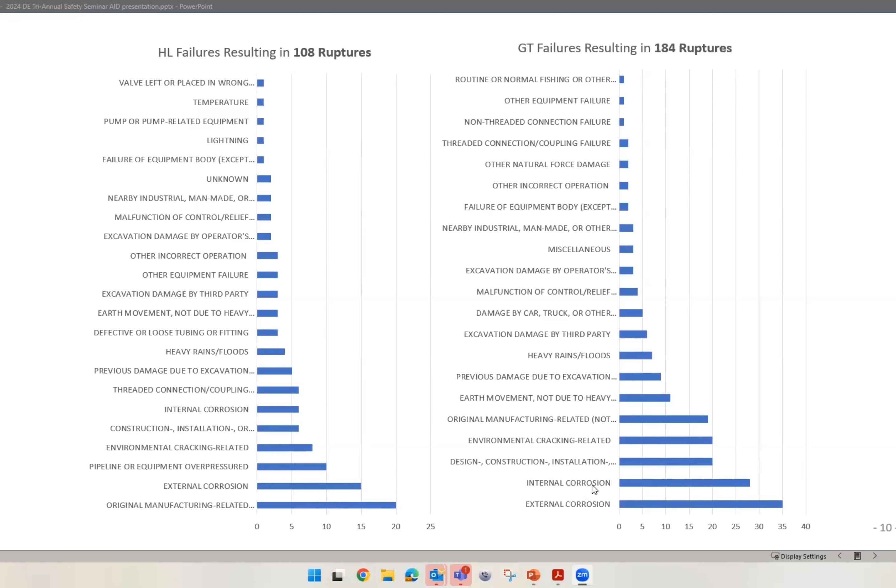So these are the hazardous liquid failures resulting in ruptures for hazardous liquid and gas transmission, and you can see not much difference when it comes to corrosion. So like I said before, what are we doing wrong on corrosion? Since it's been around so long, why is it coming up as the top 3 here as a cause of rupture in pipelines? Well, I'll discuss it.

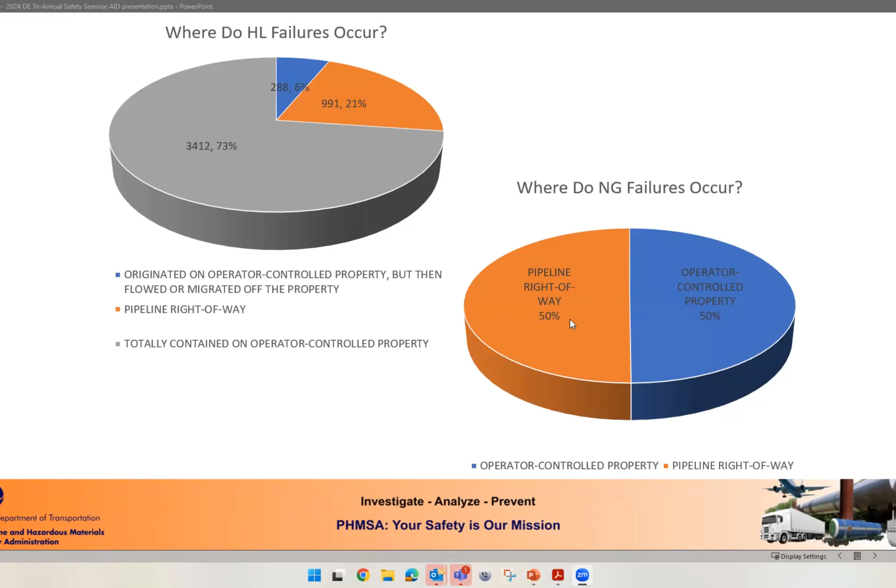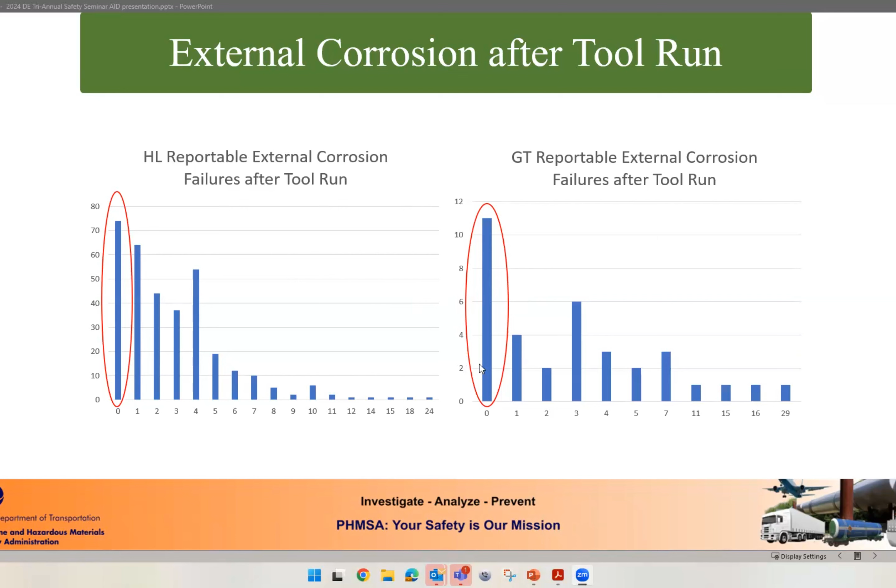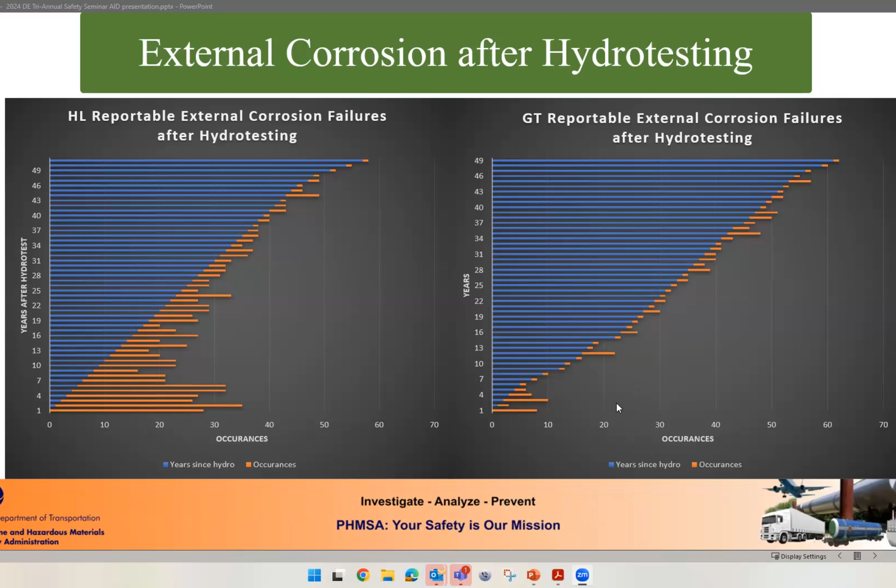So for leak investigation, in most places I've seen, they use the flame ionization pack unit. They do also use the RMLDs, but the RMLD, to me, looking at it, is not as good as the flame ionization pack unit.

This unit can pinpoint a leak. You can see how this individual did a 360 bar hole testing till a 0% gas was obtained. And it's very nice to see a diagram or an area where he found that.

The house that I deployed to, the individual didn't have any kind of graphs to show me that he zeroed out the percentages of gas. They did find gas in several nearby homes, and they evacuated the whole block. But a good graph or a good picture says 1,000 words.

So the purpose is to get zero gas in all directions. Check the nearby homes. If no one is home, check doors, windows. If a positive reading is obtained, evacuate. Check the nearby manholes. If you find any positive gas reads, continue your investigation.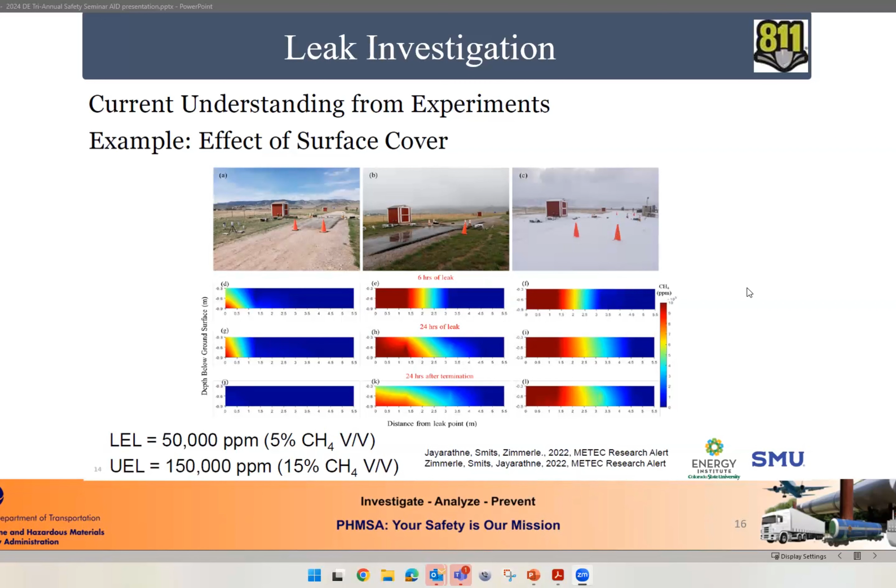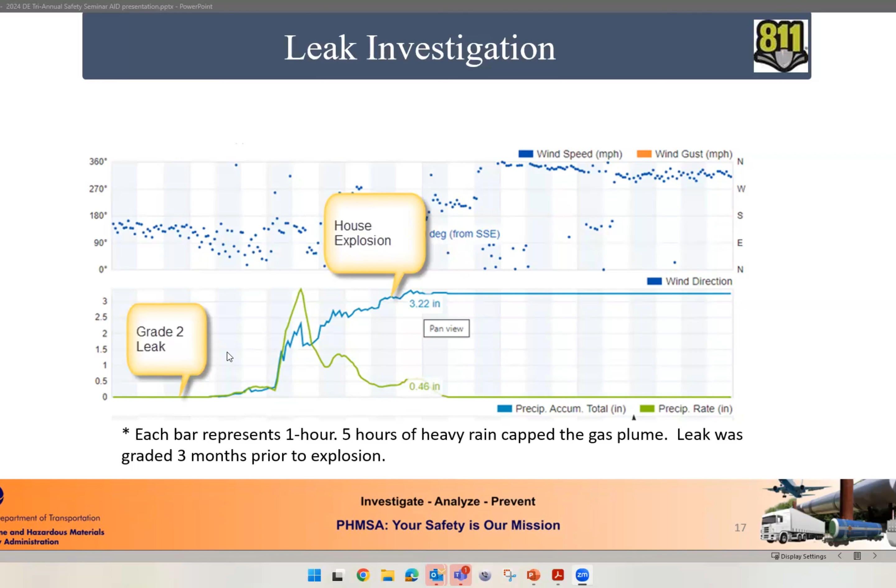So this is the picture that I showed in the front. This is the house explosion that I deployed to. What happened? The first one here, grade 2 leak. This is where the fire occurred. And when I got deployed to this location, as soon as I arrived, another house explosion occurred, which was 0.3 miles away. It was raining for maybe 3 to 4 days. So in both these cases, the gas had migrated to the homes, causing a gas leak and a house explosion.

So this is a case study I want to show to you guys. It's Atmos Energy in Dallas, Texas, gas migration. It had 1 fatality and 3 injuries. February 23 of 2018. So February 21st, 2018, day 1.

This house had an incident at 5:49 a.m. The homeowner heard some popping noise in the attic where the heater unit is located. So he went up there and he saw that the steel cover to the furnace was not on the unit. It was lying on the floor. So he decided to put the cover back on, and as soon as he hit that spring there, the pilot igniter ignited. An explosion occurred, throwing him backwards, and he never smelled any gas or odor. The arson investigators responded and determined the cause as undetermined. The gas company also was on site, but was not allowed to test because of structure damage. And heavy rains had saturated the ground quite a bit in this area.

And this is day 2. This is house number 2, had an incident at 10:21 a.m. The homeowner was alone and began to boil water. And when the flames acted erratically, it kind of went out of control and engulfed him. The fire traveled to the attic, causing additional damage. The arson investigators interviewed the witness and determined it was an appliance issue, and no gas odor was detected by residents. Rain is continuing.

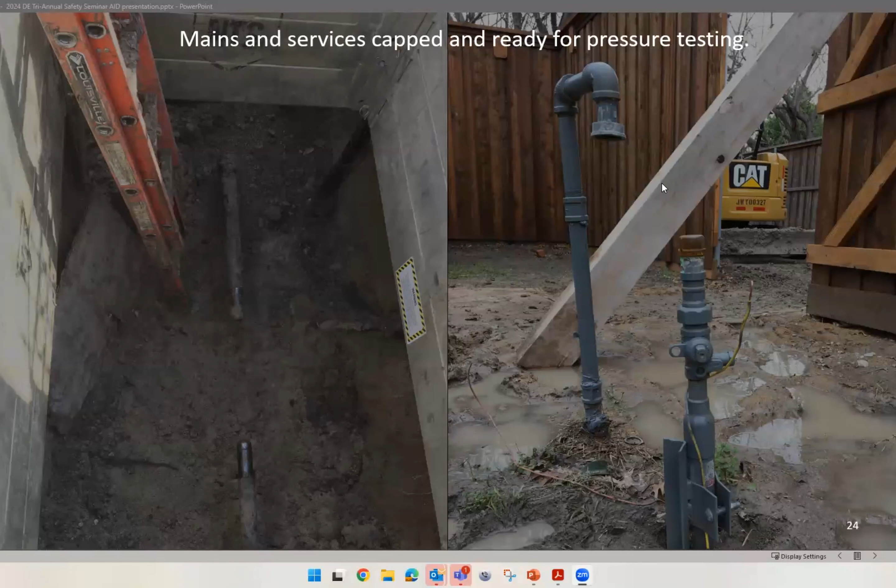If there were large sections that failed, they decided to break it into smaller sections. So this is pretty much what they did. You can see they cut and capped and pressure tested the lines here. They also closed in the meter, and you can see leaks at the service tee and stopcock.

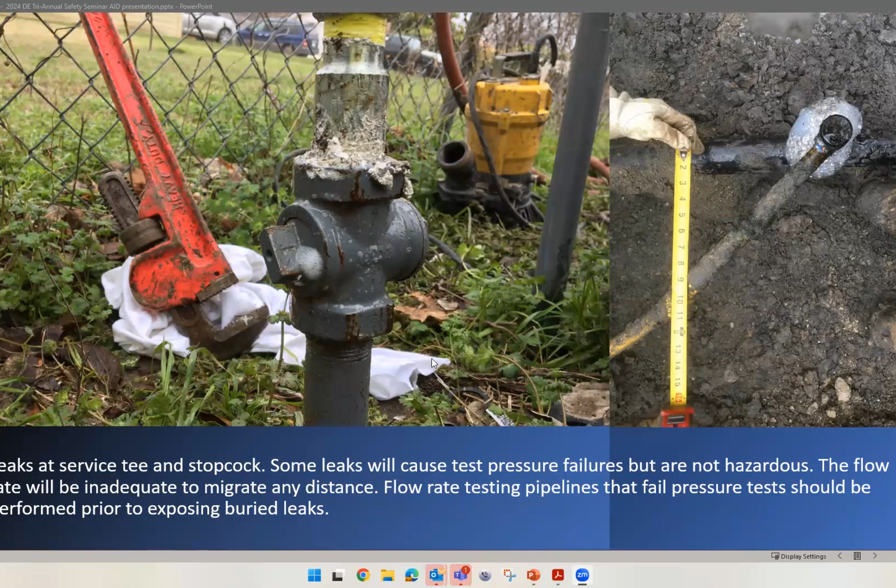Some leaks will cause test pressure failures, but they're not hazardous. Usually these leaks are inadequate to migrate any distance. Flow rate testing of pipelines that fail test pressure should be performed prior to exposing buried leaks. In other words, they need to test those pipelines prior to exposing them.

So here's what they found. During the excavation, they dug it up, and the sand bedding for the sewer line was a conduit for the gas migration. It showed that there was 35% LEL gas still in the ground, 9 days after the gas was shut off. So you can see how wet conditions keep gas in the ground.

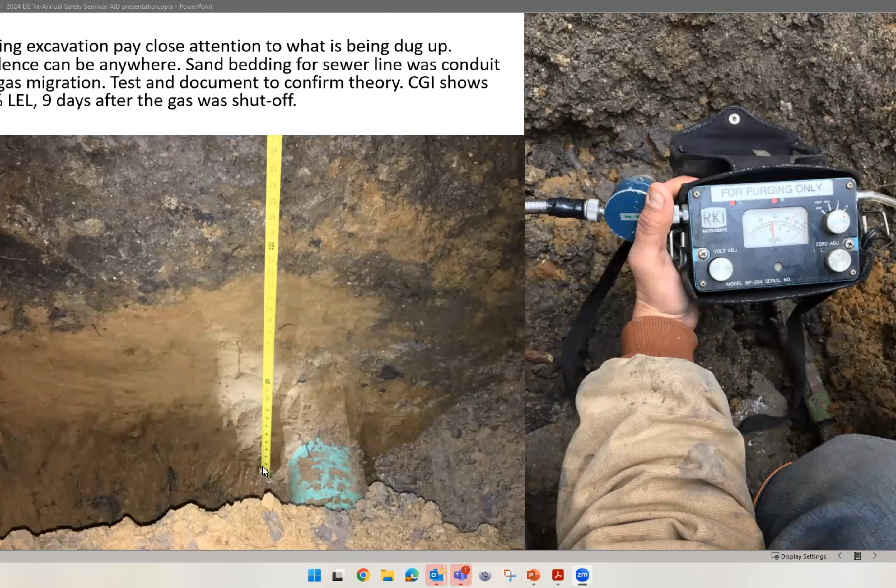Discoloration is a common thing for release of natural gas. It can also dry out and scrub out odorant. That's the reason why these homeowners didn't smell the mercaptan.

This is what they found. They found a Coke bottle in this area, dated to 12/15/95, and that date corresponded to the date where they installed a sewer line. So what they did, they installed a sewer line, and it only had 2 inches of clearance.

So what they decided to do was push down on the sewer line, and that pushed down on the gas line. You can see how it dented the gas line. It was done in 1995, and it dented and gouged with the excavation equipment, and failed 23 years later as a circumferential crack. And you can see where they found it.

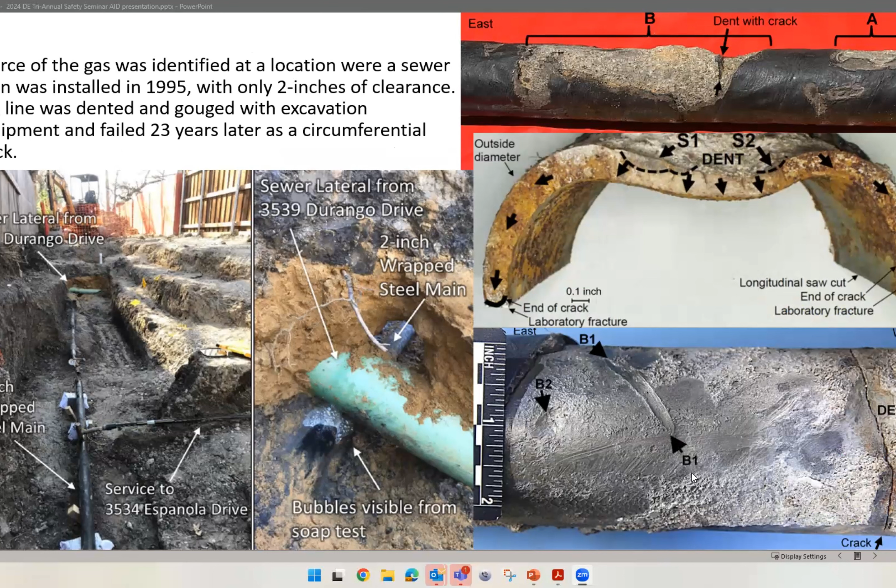Yeah, it was a bad situation for them. And you can see these gouges right here on the B1 to B2, or B1. And this is where the picture laid out.

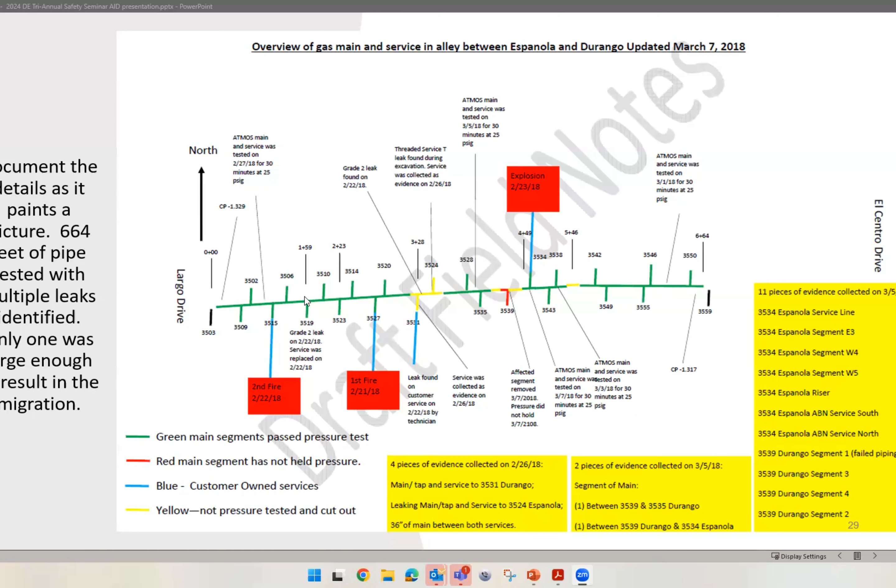The red line is the area of the sewer line, and they also had a grade 2 leak further down the block there, but the migration came from that damaged pipeline, from the sewer line, and the gas migrated with the wet conditions. It removed all the mercaptan by the time it got into the house, and that's why the individuals in those 3 homes could not smell it.

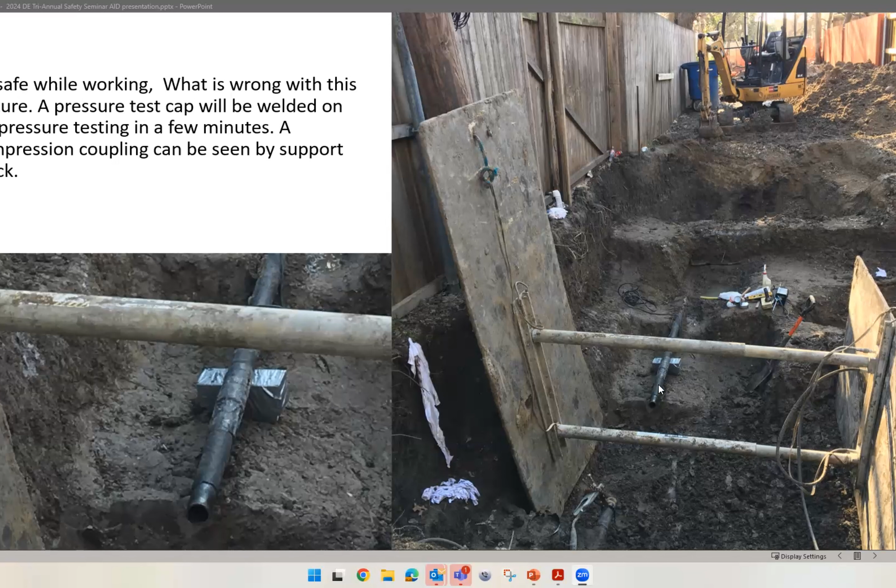That's one thing, but the support—you see how this telephone pole is there? That's not a good means of shoring. That pole can lean over at any time. So when you're out there, these are things you got to look for. Is this a safe working condition?

And the last picture I have here is the Texas Sandman Signature Hotel explosion that occurred. You can see this individual, the operator, trying to use a drone to check the gas meter and the above ground structure, to see if it was safe to have somebody go down there and work on checking the meter. In this incident, they pressure tested everything up to the meter and found no leaks. What had happened was after the meter customer line, they did some work inside the restaurant, and there was a leak inside there, and that leak caused the explosion.

And that is pretty much it for me. If you have any questions, I'm all ears right now.

Well, hey Blessing, I think the pictures are good illustration, more illustrations in Delaware of what happens when we do have a gas incident, and I hope we don't see one anytime soon. But I just want to make you more aware that things can happen, and we'll do whatever we can to mitigate that and make everybody safe, not only the employees and excavators, but the public. So I want to thank you for the pictures, pictures are worth 1,000 words.

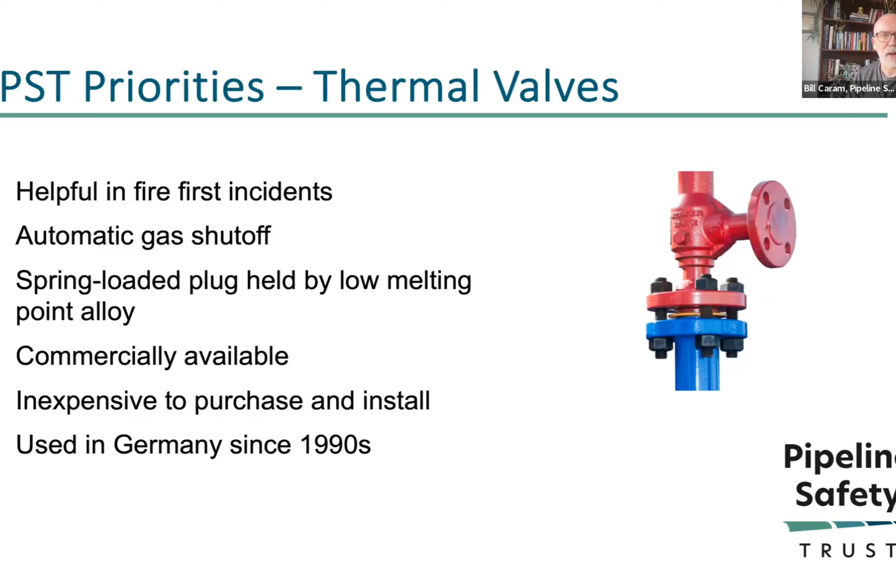They're widely commercially available and inexpensive to purchase, just like excess flow valves. However, unlike excess flow valves, they're also extremely inexpensive to install. They've been used in Germany for decades, and Massachusetts has been using them. We would really like to see widespread adoption of these thermal valves.

I talked a little bit about hydrogen. I haven't seen anything in Delaware, but part of the shortfall in the regulations is that operators don't need to report that they're blending hydrogen into their system — they only need to report the predominant product in the pipeline. So we don't actually know where hydrogen blending projects are happening in distribution systems. They often seek reimbursement through a rate case, and that's how you find out. I haven't seen anything in Delaware, but we are seeing blending projects pop up all over the country.

We issued a white paper a couple of years ago about the unique risks that hydrogen poses to pipelines. Some things are well known and understood, like embrittlement of steel, but there are other aspects too — really around the physical properties of hydrogen, how easily it leaks out of infrastructure, how flammable it is, how explosive it is.

What's really not well understood yet is that the production of hydrogen is being incentivized as a climate solution, but a lot of people don't realize hydrogen itself is an indirect greenhouse gas — it prolongs and intensifies methane's warming effect in the atmosphere. Given its propensity to leak and the poor leak detection technology in place for it, we may be introducing safety risks into a system without doing much to contribute to climate solutions. So we're asking for more information about what kind of risks we're exposing communities to with these projects, and for what benefit.

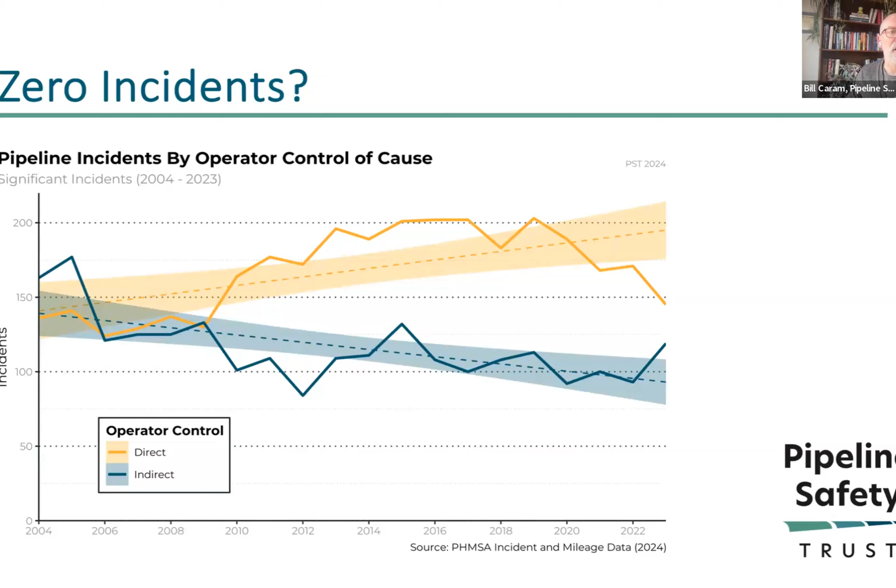And if there was one area we could make progress, I would say it would be on serious incidents on distribution lines, because those are the ones that lead to the majority of fatalities and injuries. So that is good news, but we still do have a lot of work to do there.

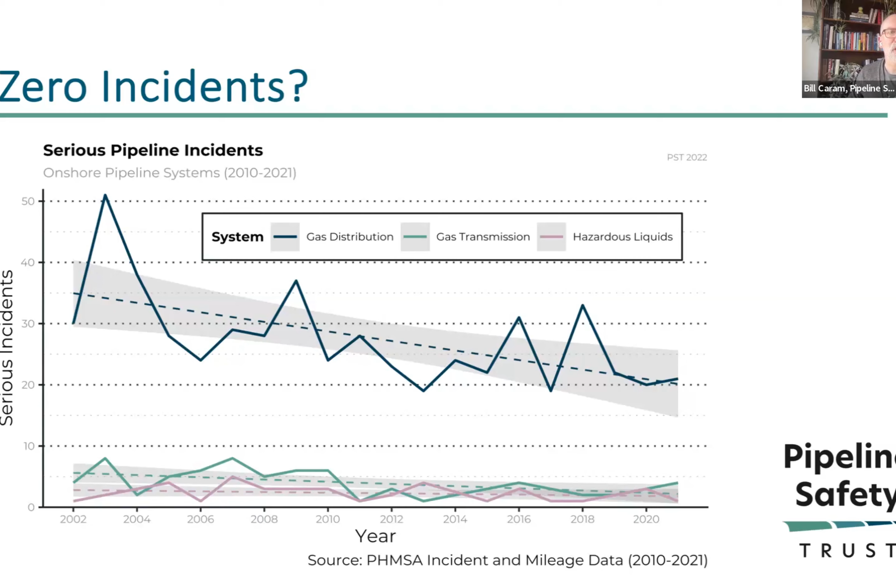The one thing we noticed on the number of serious incidents is it doesn't account for incidents like the one that happened in Pennsylvania last year in West Reading, where it was one serious incident, one pipeline explosion, but it killed 7 people. So we looked at the number of fatalities as opposed to the number of incidents that caused fatalities and injuries.

The first chart there is over the last 20 years, and the second one is over the last 10. Last year, 2023, was actually the deadliest year for pipelines in a decade. Over 20 years, we have made some progress. There is a trend line down, but you can see there's not a lot of confidence in it. It's not a strong trend in any way.

And even less so over 10 years. Our goal, and I think all of yours as well, is zero incidents. Zero incidents starts with, I think, the first step would be zero fatalities. Stop killing people first. And you can see that we're not making progress fast enough there.

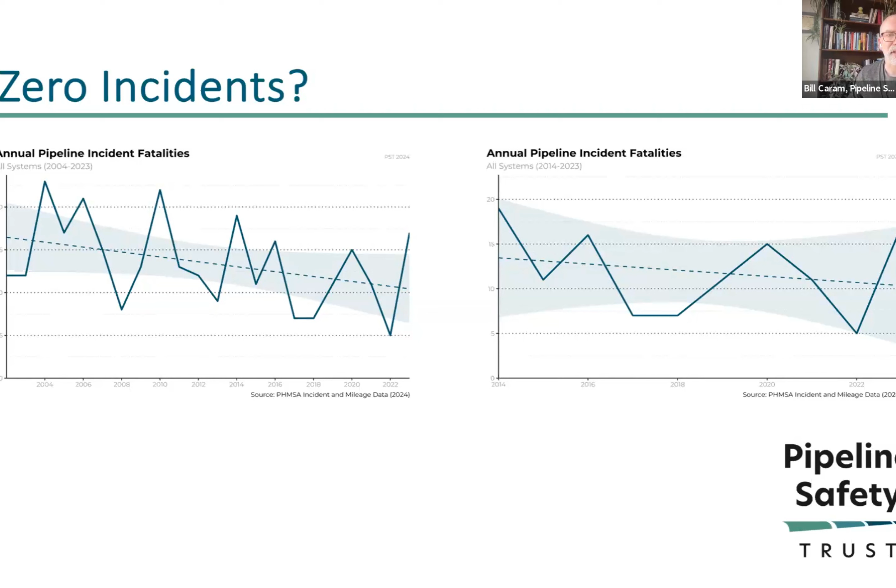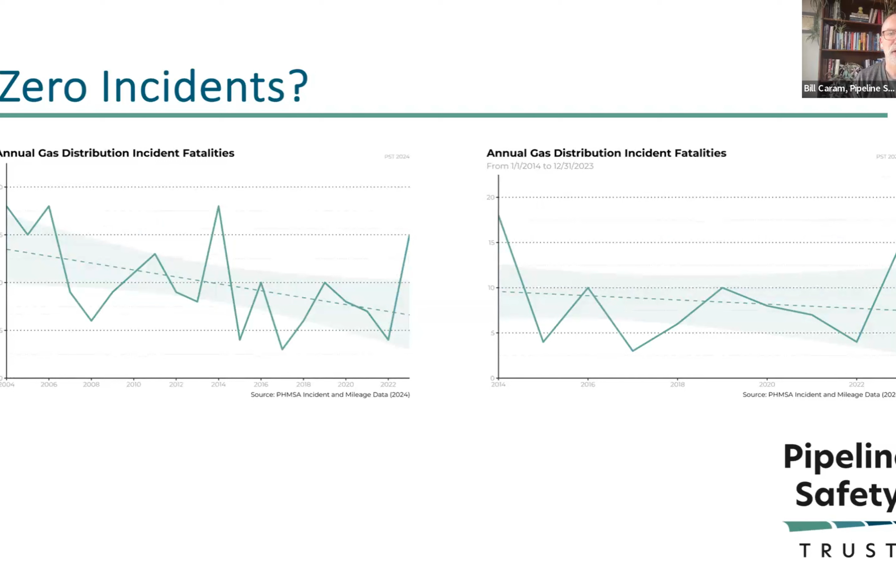This next one looks at the same information, but just for gas distribution. And you can see similar trends there, a downward trend, but not very strong over 20 years, and not much of a trend at all over the last 10.

And there is my contact information. I have an open door, would always love to hear feedback. Any way that we can do our jobs better, or anything you want to talk through, please don't ever hesitate to reach out. Again, I really appreciate the invitation, and if there's any questions or anything like that, I'd be happy to take them.

Bill, you still there? Yeah, I'm here, Wayne.

Thank you again. I want to say that Delaware is going to be participating in the Mid-Atlantic Hydrogen Hub, so we are going to be one of the states participating in that. Do you know if that's intended to lead to any blending projects in distribution, or is that just production and moving it out in a dedicated hydrogen pipeline?

In our PSC with that, there's another gal here who's more up on it, but I think it's production for sending it to industrial use. As of right now, that's what I think it is. I don't think it's like I've seen in other states where they get the hydrogen from water and then blend a little bit as they're making it from water, blending it into the distribution. I don't think that's what it's about. I think it's about... Well, that's good to hear.